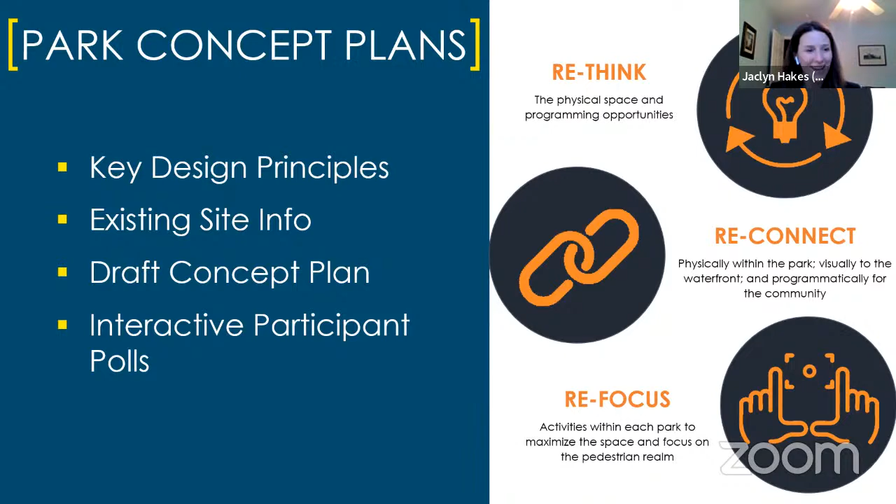And I do see some faces that I'm sure were part of the second public meeting where we introduced this, so this might look a little repetitive to you. For that, I ask for your patience. But let's start with the ball field.

Let me get my cursor here. So the key design principles for the ball fields are really to look at the parking, identify ways to improve or expand the parking, and look at the pedestrian circulation within the park, and potential connections - not only to the activity centers within the park, but outside of the park to key destinations.

When we asked the public what they thought of this - I'm not going to have you do the poll. Oh goodness, it stopped. I wanted just to see the reaction, so this is not working because I'm live. So that did not work out so well.

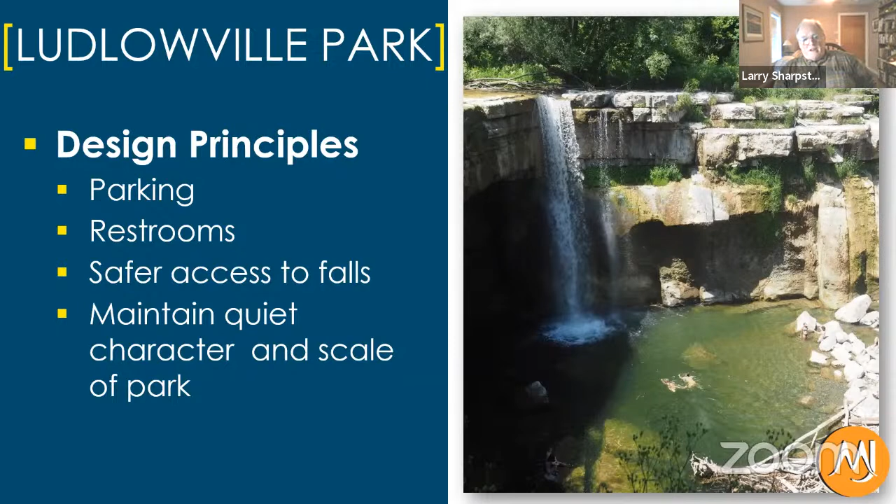So I am concerned—I agree with Dean about getting lighting in there. And I'm also concerned about having the place patrolled regularly, to make sure things are done so that the town has at least done its due diligence with regard to life safety for the residents and the users.

Okay, Jackie, one other thing I noticed—at the northeast corner there's currently a crosswalk, and it doesn't look like that crosswalk is incorporated into the trail system, for coming across the street from the north. Sure, sure.

Okay, you develop a lot of parks—is this adequate parking considering grandparents come and watch their kids?

And to your point, one of the key things we had in mind with all of the park improvements was trying to make these accessible, for folks whether they're pushing a stroller or have other mobility issues—making sure, by having some of these more formalized pedestrian paths, that these places are as accessible as possible.

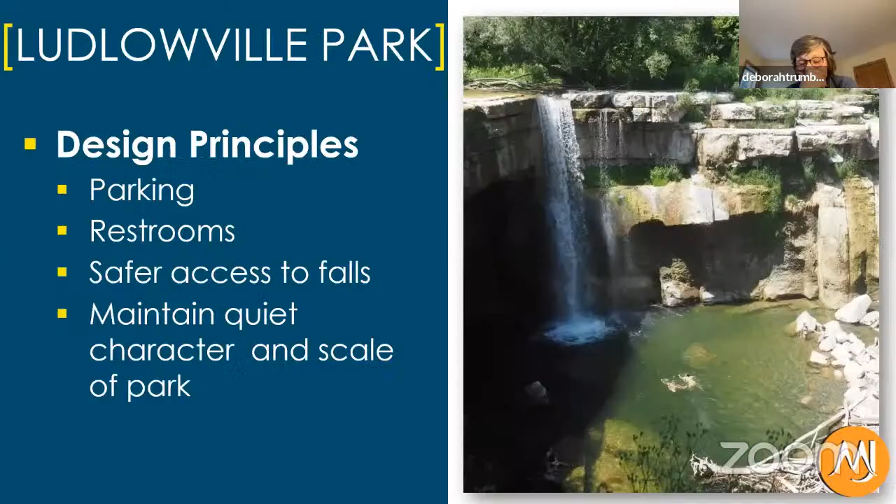Here's Ludlowville Park. The key design principles here were to add parking, add restrooms, create safer access to the falls, including an overlook. Here's some of the expanded parking, the restroom, also a perimeter path, access to the falls, and ultimately maintaining that quiet character, because this does truly serve as a neighborhood park. So that's what's identified here.

Myers Park, obviously your flagship. This had the most significant amount of proposed improvements, focused on design principles related to parking, pulling that parking away from the lake, because it really was blocking access, not only visual but physical access to the lake, which is such an amazing resource. Enhanced pedestrian circulation, restrooms, and creating more defined spaces.

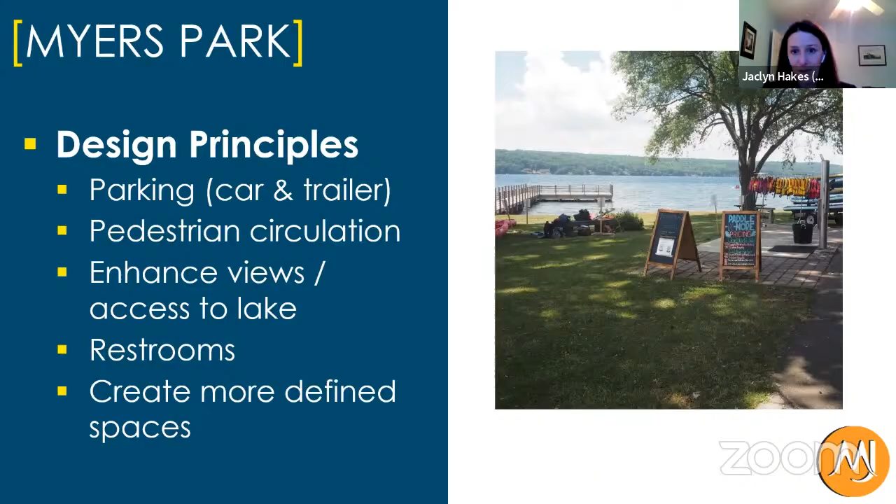You'll see the parking got shifted over here. There's 193 parking stalls in this concept, with 75 boat trailer stalls. The RV campsites remain here. There's the addition of 5 additional tent campsites. Turning what was the roadway into more of a pedestrian access, improvements to some of the facilities including the bathrooms, creating kind of a nice little promenade along the waterfront here. So those are some of the key elements here.

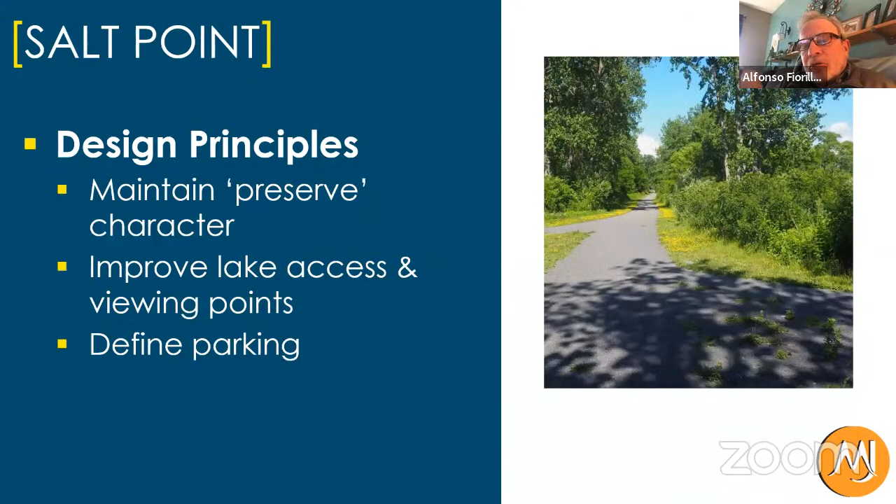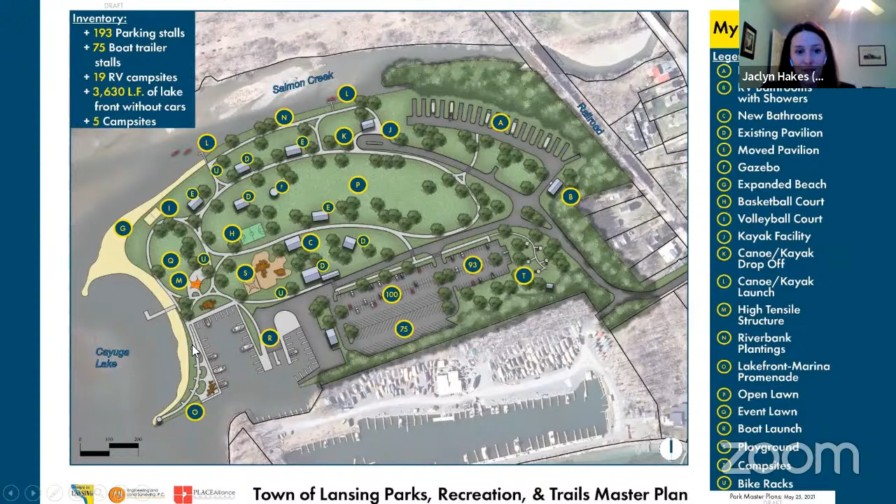These two brown structures by the boat slips, what are those? I didn't pick that up. The boat slips here, the down marina here. Yeah, there's a brown structure in the corner. And the other brown structure, what are those? Those are part of the promenade, so artwork or some creative visual aspect of this promenade to really turn this into an area.

Here are some of the conceptual elements along the promenade, like trellis swings or creative seating. Thanks for showing that pavilion. I think that's important as parking is moved away from the pavilion, that's a great part of the concept. The whole idea is wanting to keep it convenient for people, but still not giving up some of the most valuable space in your park to parking vehicles.

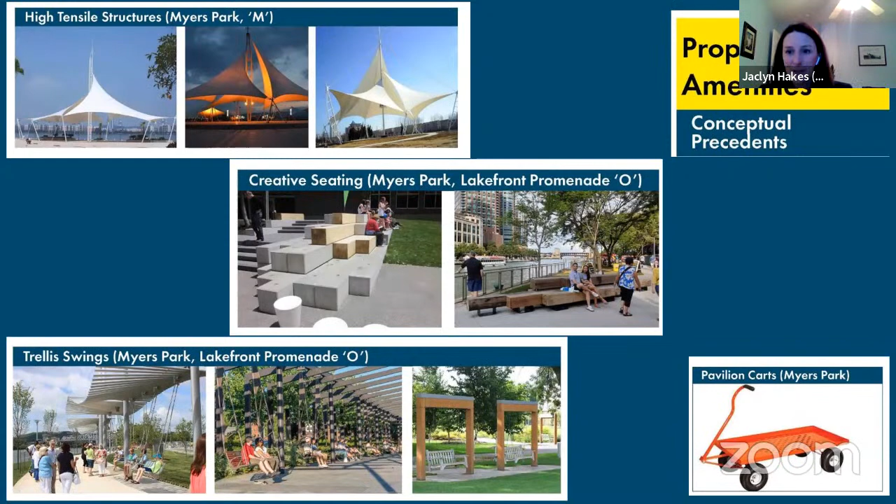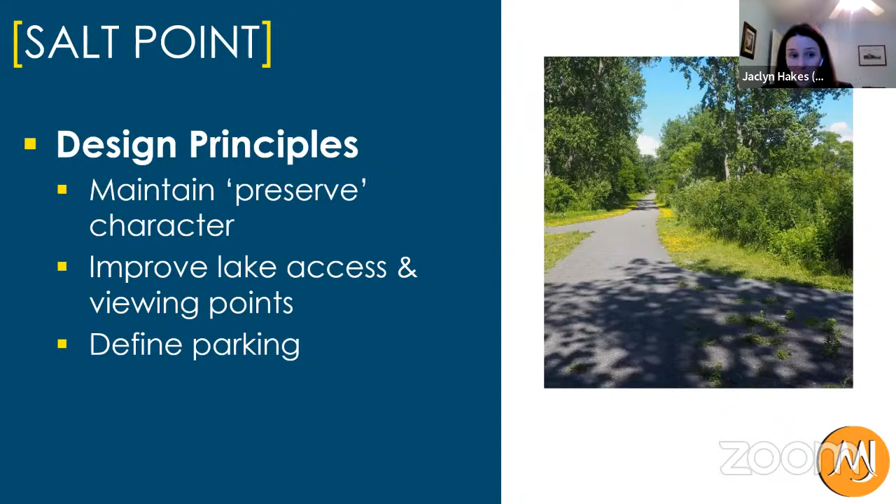All right, so here we have Salt Point. The idea here, and I use the term preserve lightly, is to maintain that character that exists within Salt Point, but also try to improve lake access and viewing points, and define the parking a little more clearly. The existing parking stays, but we create a more formalized path for the fishing area. Then adding additional parking, allowing for folks to offload, whether kayak or other type of boat, and connecting with the existing pathway. These D's identify maybe some additional access points along the waterfront area.

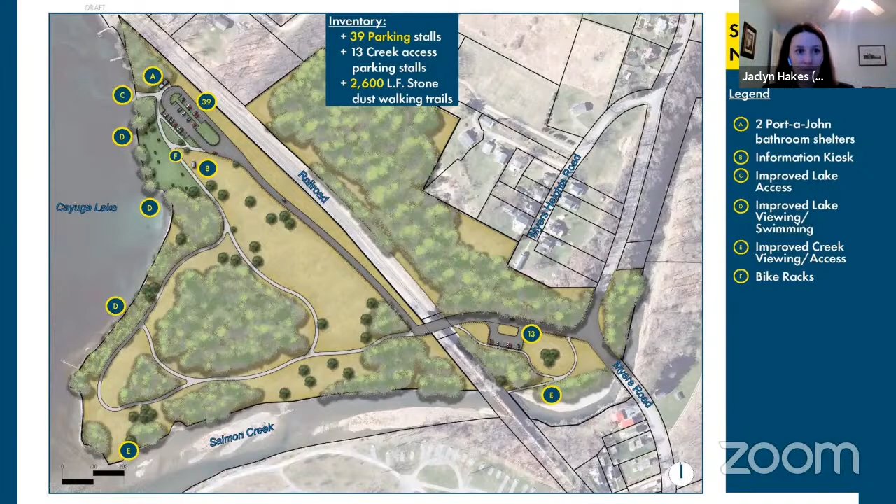The barn field, some of the design principles here are really focused on parking, restrooms, pedestrian safety. There's really no formal space for pedestrians other than on the road right now. Opportunities to use this as more flex space as an open field. Adding some protective fencing and additional recreational amenities.

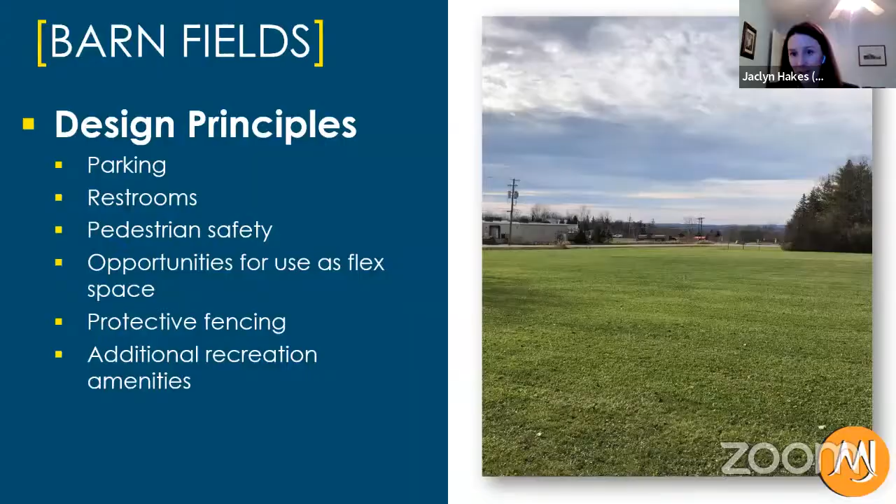What we're proposing here is utilizing the shared parking area, defining it a little more, having a crosswalk, creating a pedestrian pathway along the edge, adding some trees for shade for those watching the kids on the field, creating a playground area, pavilion, and some picnic table areas. So it can be more than just a space for active recreation, really enhancing that area. Also identified here are some drainage improvements that we understand are necessary as part of the field improvements.

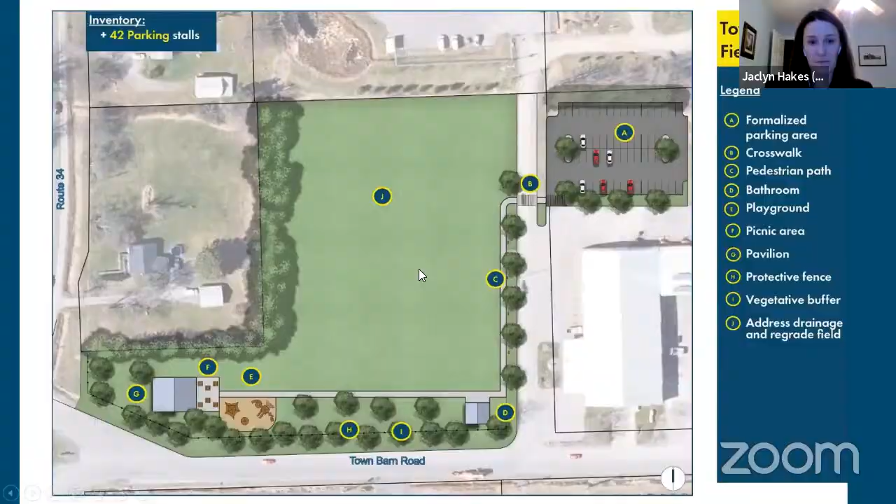Okay, so those are the concept plans. I can share this with you, and also share the link to where they can be found on the website.

Just very quickly in terms of the draft master plan, the committee is currently reviewing the draft master plan document itself. We were hoping to have that finalized very soon, but I'll need to coordinate with Pat and CJ about the timing, given that the planning board is looking to provide some additional comments on the concept plans. Ultimately, this is the roadmap for what future improvements and investments should be made within your Parks, Recreation, and Trails system.

There are 6 sections within the master plan itself. If you see my cursor here: there's an executive summary, an introduction, a section on the benefits and need for recreation and parks planning, a discussion about the regional context, recognizing that while the town has its own park system, there are recreational opportunities more focused on regional connections. Then we focus on existing conditions, the Lansing Park System Today section. And then the concept plans, with cost estimates for improvements and the implementation piece, which we're calling the Lansing Park System Tomorrow. So those are the sections.

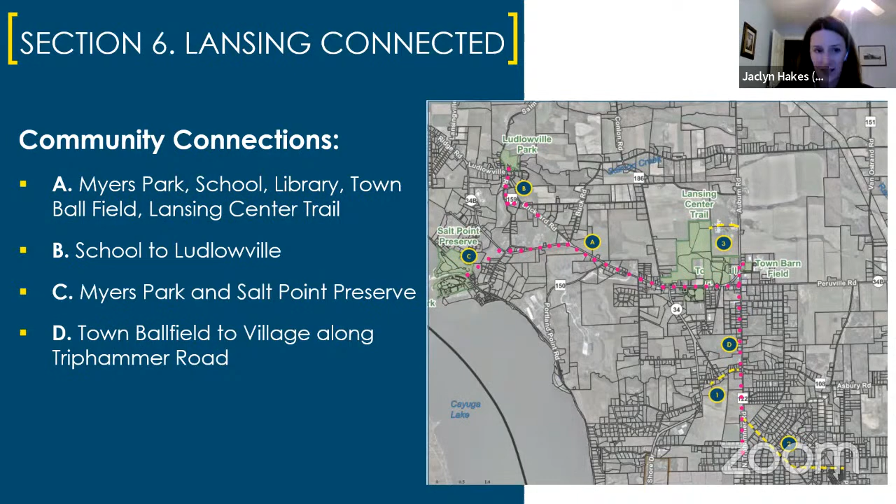One other thing I want to point out is that there's a Lansing Connected portion within section 6 that looks at trail connections. We're working with the committee to finalize this, but there are broader community connections—key destinations and connecting those destinations, whether it's Myers Park to the school to town hall. Then we have smaller neighborhood connections, some closer to the village. We're working with the committee now to identify key nodes to be connecting through this connections concept plan. So that's what I have.

I know that was really short and we kind of got off track a little, focused just on the ball fields, but we do appreciate those comments. CJ, if the planning board does want to provide additional comment, we can send them the links to the concept plans. If there's a time frame within which we could expect those comments back from the planning board, we can regroup in terms of how those get integrated into where we are in the process right now.

So Jackie, a quick question: the last document you just showed, with the 6 different points, where is that on the Parks, Recreation and Trails Master Plan website? It doesn't exist on the website yet because it's still going through review by the committee and the town.

Yep, I think that's important to bring out. As an example, after this presentation we're going to be meeting with the convenience store, and sidewalks along the road that would connect Town Hall with Myers Park—you've got to start somewhere. That Dandy Mart and the sidewalks in your concept plan connecting the ball fields with Myers Park, with Ludlowville Park, all should be integrated. That's got to come out or be approved by the town board, I think, so the planning board can keep that in the back of their mind as we work with different projects.

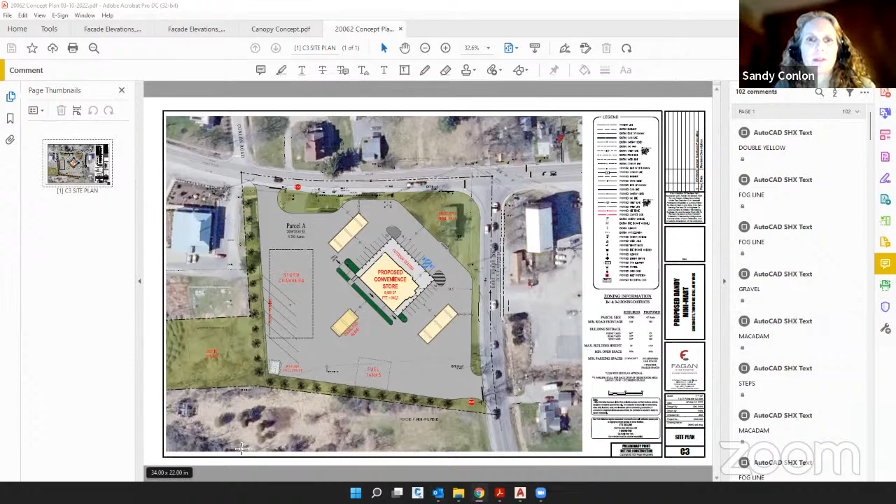Yes, cool. Okay, so what you got in front of you is our latest rendition. Let me just close that, make sure I get rid of this YouTube channel. Sorry, can you zoom it in a little bit? Yeah, definitely.

So we did get commentary from DOT in the meantime as well. They've stated that the two preferred locations... obviously we're not going to get a third driveway, so we took that out. We went by where they said to place the driveways, which is exactly where we had them before, the two most distant from the intersection. So that kind of informed us on how to proceed on the rest.

To also maintain the front visual of the intersection being our front door—this is a corner lot, so it gets a little more complicated. We broke the canopy up into two and relocated them on the sides. The diesel island is in the same place it's always been, the drive-through is still working on the back side, and we expanded the outdoor seating area out to the front, or we'll call it the front, but it's towards the northeast corner of the site.

We also expanded the landscape area to the corner, roughly 2/10 of an acre out of the site, around 8,000 square feet in this area. As you guys were mentioning before, the big thing is to get the orientation down for the building, get the layout for the building, but then we'll come back and populate a landscaping plan and screening plan.

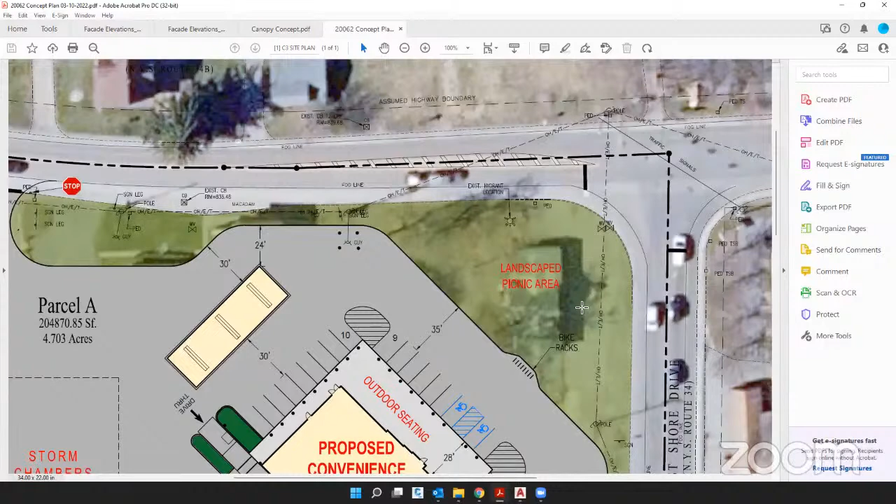One of the things I did want them to look at is the potential of restriping this area so we can work with what's out there, potentially reducing the shoulder and creating a turn lane there. The one thing they worry about is the left turn motion creating some conflict. So we brought it up to them. We'll continue talking to them, but if you've ever worked with DOT on stuff like that, it takes a while. I wouldn't be surprised if it takes longer than what we need from an approval point of view. But we will continue to discuss it, Jamie.

When you were saying you needed extra acreage or depth or footage there, are you talking like 2 or 3 feet, or are you talking 6 feet or 8 feet? What do you think on that?

It depends what they would require, but if you're trying to mimic the existing shoulder width, you're pretty much talking about another 8 feet interior into the site. But with a turning lane, you don't need that existing shoulder width, do you? That wide width that's there now? That would be my argument, yeah. But DOT has their own determinations there.

Okay, but if you notice the width of the shoulder here versus the width of the shoulder here, it's about the same. But like you said, over here, people... well, that's shoulder. I guess I've always treated that as a right turn lane.

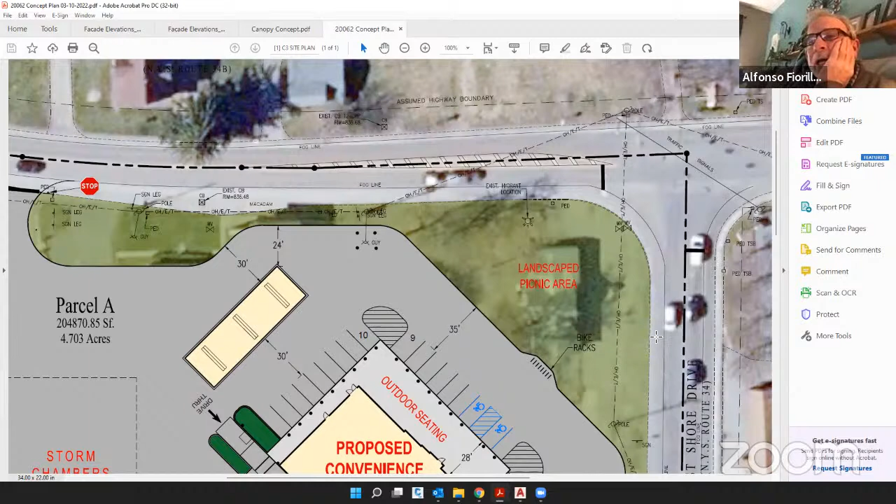Maybe I'm wrong, but no, yeah, it's illegal, it's a solid white line. I shouldn't have said that, huh? But there's a sign there now that says don't do this. Oh really, there is? I didn't even pick up on that. Yeah, wow.

And given the curb, normal condition in a municipal area, in a built-up municipal area, if there were a granite or concrete curb in place, I don't see a need for a shoulder on the turn lane approaching from the west.

Was a proposal made to them of providing a curb? We haven't made any proposals to them. We don't have any indication the project's moving forward yet. So we've just done the initial application to say, okay, this is the scale of the project, this is our proximity of the driveways now. And then they've actually looked at the scale of the project and said, okay, that's great. This is where you're going to be looking at the driveway locations. Here are the dimensions that are given to us. And then we go from there.

The actual intersection, work within the intersection, we cannot do that. They would actually have to incorporate that, because there's no requirement from this size of a project to do any improvements to the intersection. The intersection is a signalized intersection that operates efficiently in their mind. Might not be in your mind, but in their mind, it's got an acceptable level of service.

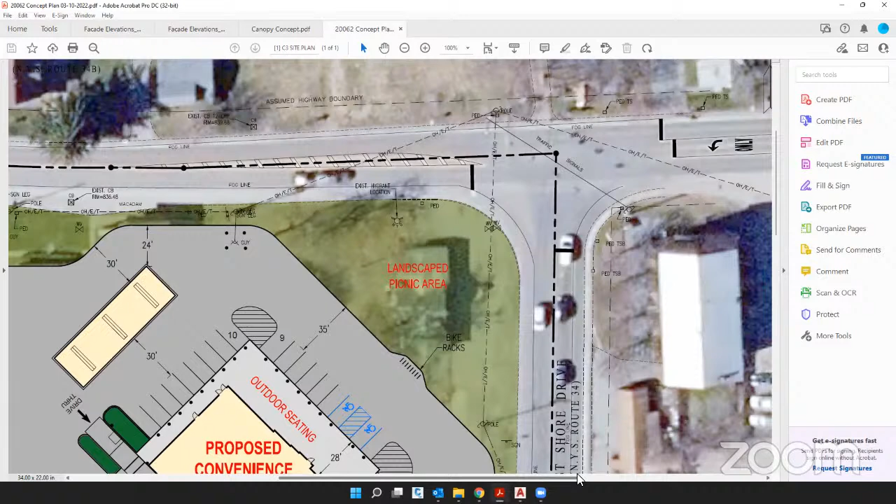So to request additional improvements to that intersection takes a lot more. We'd have to go in as a combined applicant, the town and Dandy, to actually approach them on that. Okay, so I think that's a separate conversation to be had. Let's put it that way.

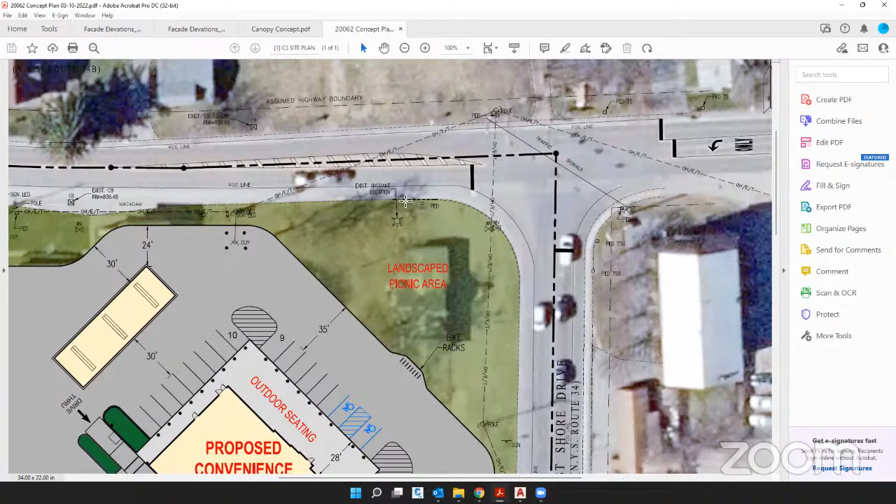So Jamie, there's concrete curbing the state put in maybe a year ago or so on that corner. Yeah, just right there. Is that what you're looking at as being the existing line that you would use that's there now?

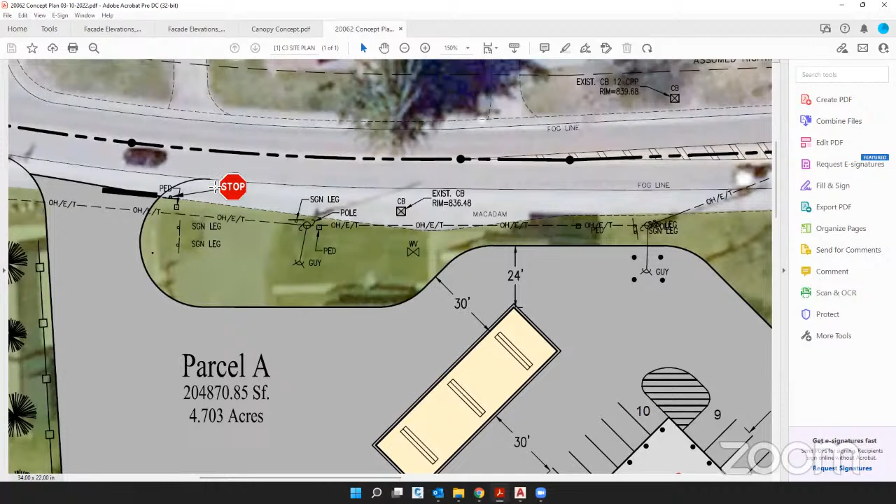Correct. We would not, under this approach with DOT — they're only having us look at within the radii of each of the driveways. I apologize, this is going a little slow. So you've got here to here, which is a 36-foot drive, as well as on East Shore Drive.

So would you be extending that curbing in each direction, south and west, as part of this plan? Or would the DOT do that? I don't think... or would there be any? They haven't stated that would be required. I guess we'd have to look into why they required it for the intersection, other than they probably just put it there to make sure people didn't cut the corner.

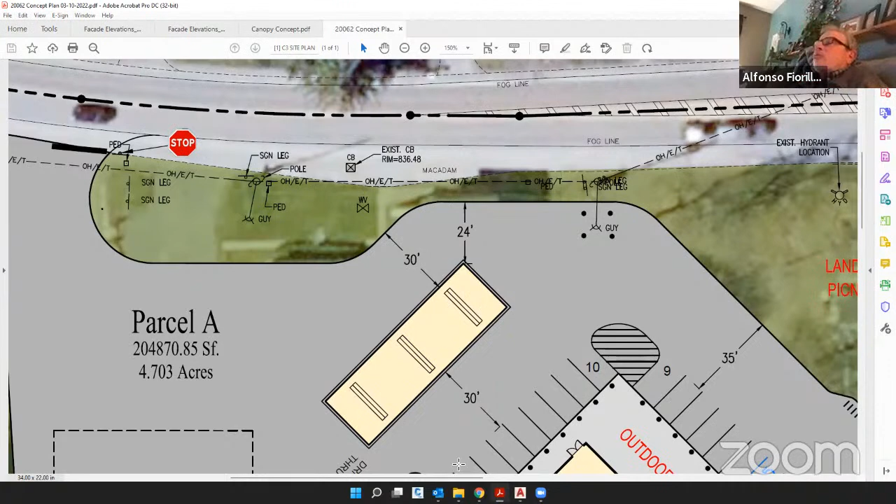Yeah, I think you're right, I'm guessing you're right in that situation, because with this type of road, you typically do not put curbing on. It's actually a danger to the public, the traveling public, in their mind. They would rather have the wide shoulder. Okay.

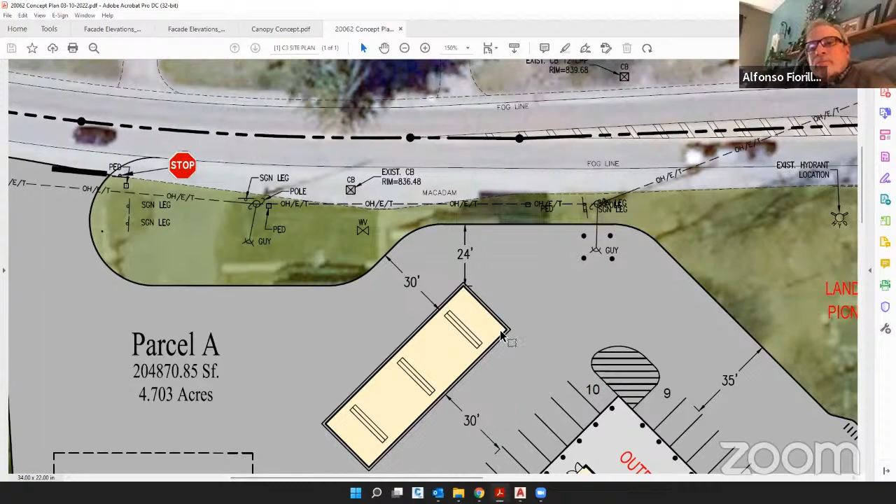Your exit off of East Shore Drive, there's a house right across the street from there. How are you going to mitigate the impact of having an exit right across from somebody's house, in terms of headlights shining in their house every time somebody turns? I don't know what you would actually do for that, other than the position of the drive is being dictated by what DOT wants.

Now, if we need to move it—actually, I'm just kind of looking. Joe mentioned that there's a culvert or a creek there at that drive existing. There is a creek there of sorts. Yeah, we would be able to handle that from the drainage point of view.

But we haven't gotten into that yet. We kind of went back to scratch to make sure we got the layout right. Once we get the layout right, then we'll go into that exercise of grading. Grading design takes longer for us to actually do than the pretty picture you see in front of you. But we would need to go through and make sure that we're not impacting our neighbors, obviously.

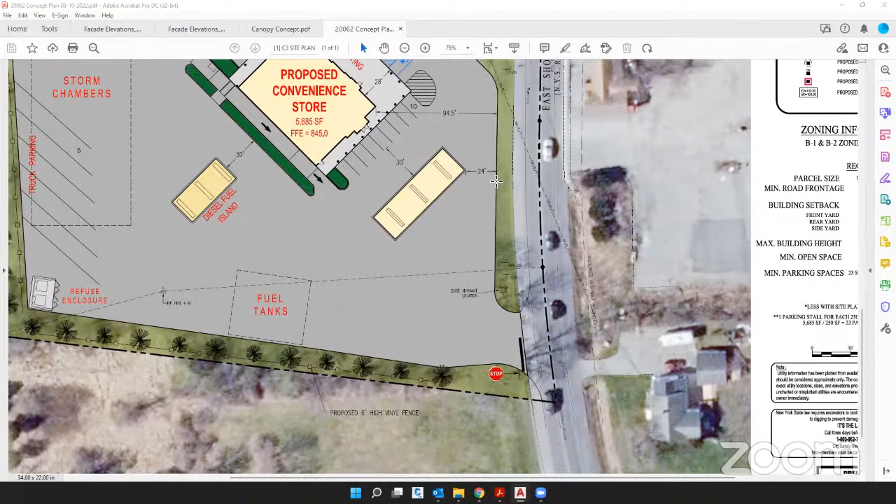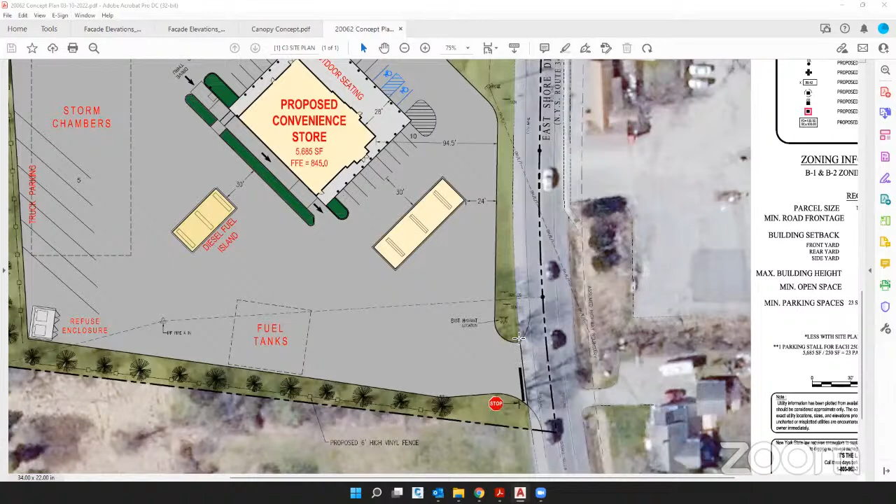More than likely, the way we would design this is that any stormwater captured in this green area between our two drives would be captured into our stormwater plan. So we would take on more, even though it's not required, the stormwater from the road, because no matter what you say to someone, if you put a culvert pipe through here and there's water flowing through it, it's all of a sudden our problem. Even though it's probably there already because of the road, we would take care of that and use our storm system—our storm system's oversized.

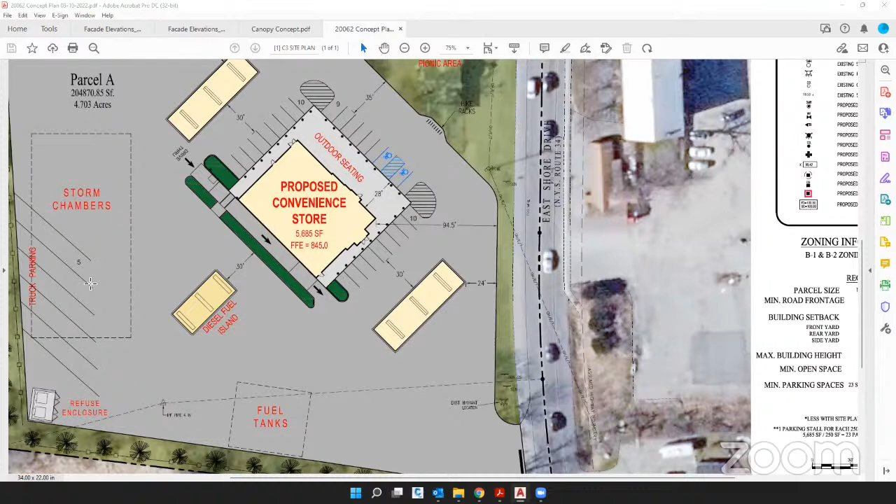Initially, we've actually kept the original design on the books right now. Our lot coverage rate is actually reduced based on this layout, so we've reduced the amount of square footage of impervious surface going into the system.

On this layout, Jamie, where are the electric charging stations? I was thinking they would be in this area here, but I'd better double check with Dwayne. Dwayne, are you still there? Honestly, I haven't thought through on this one where we would relocate them—whether they'd stay in the area of the building where we had shown them before, which would be right where Jeremy is now, or if we may relocate them off into more of a standalone area. Okay, they will be on there though.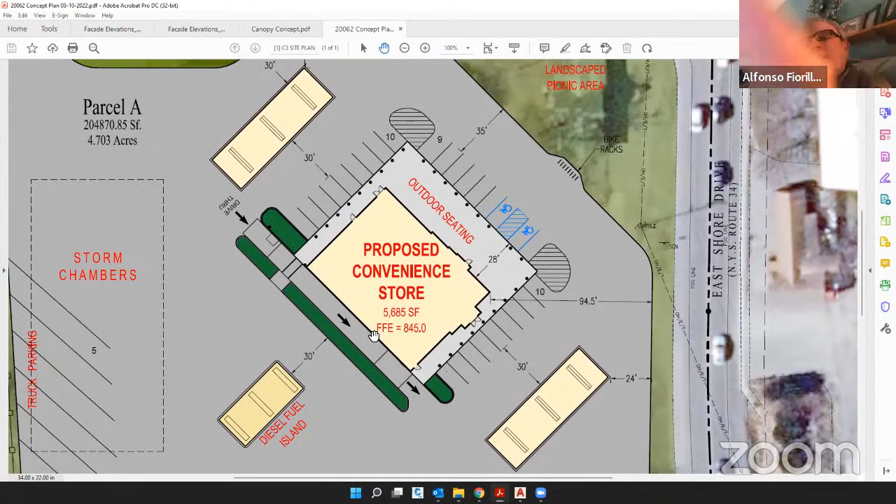So while we've got this layout, let's say we're okay with this. You've got the gas island to the northwest. There would be an entrance door, those double doors—is that what they would use to come into the store? No, what we're proposing with the layout we're working on actually has three entrances. The building we're working on, we're going to try to make it look as though it has three front entrances. So the single door towards the fuel islands on the northwest side would be the entrance. There's also a door, which in our latest rendition is actually a double door facing the intersection, and then double doors facing East Shore Drive.

So the gas islands—the flow of pedestrian traffic from the islands to the store, if they left their cars at the island, would use those side doors, and then the seating area would use the door to the northeast, so to speak. Is that the correct idea?

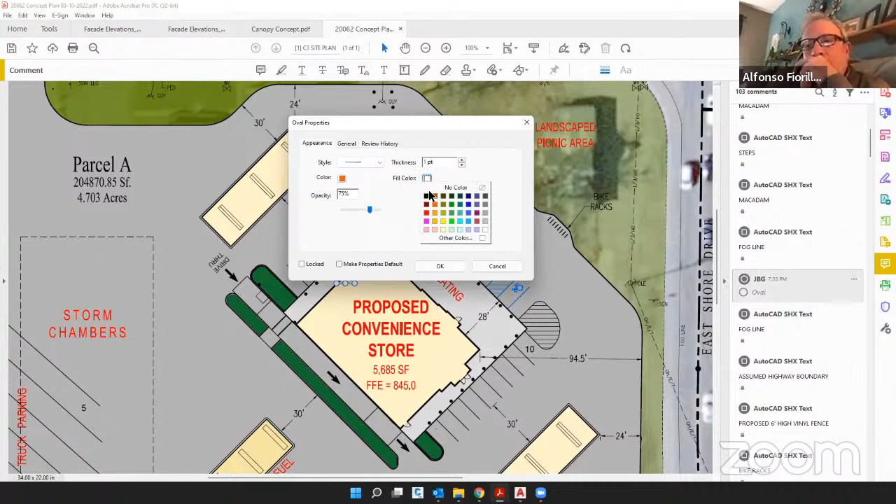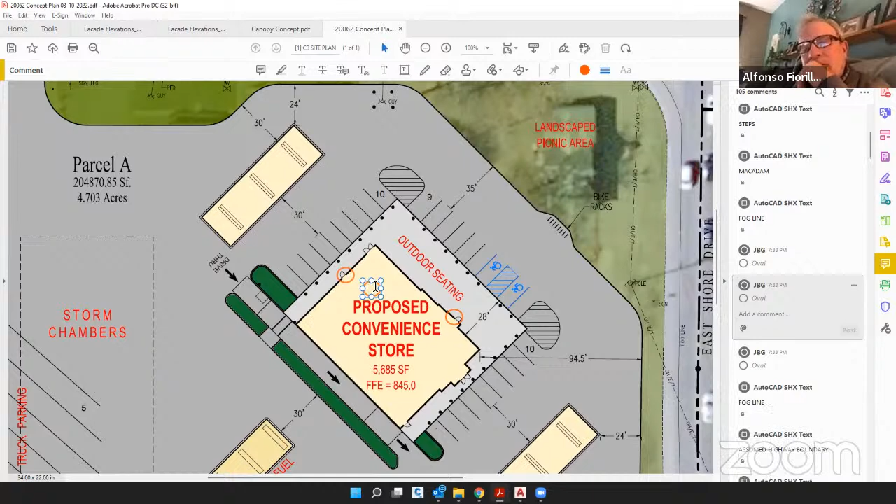Yeah, we're trying to create a store that—again, we're in the convenience business—we're trying to create a model where the person, if they're looking for fuel, it's easy to get into. But whichever fueling location you're at, you also have easy access to either pull ahead and park or just come inside the store through an entrance. From your seat, I hope you can appreciate the fact that we're trying to create the look of three entrances, because a lot of traditional buildings have one entrance, so you have one side of four that looks great, and then three other sides that are quite plain typically. We're trying to create something that has curb appeal on all four sides.

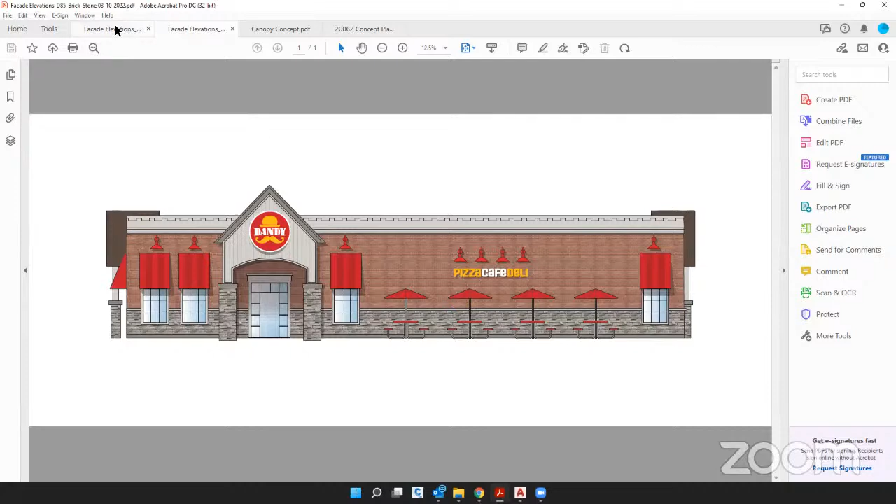So this was the initial layout, or elevation - just the front elevation towards the intersection. The architect further refined the entrance, so you see it faces northeast towards the intersection, with similar features on either side. We don't have the full renderings yet, but we wanted to get what we could in front of you.

Could you talk about the materials, the finish, the colors on that? Yeah, so this would be a stone - I wouldn't call it a knee wall, but about 3 to 4 foot tall cultured stone all the way around. Then brick - that would just be a red brick, and the tones we can still look at.

This is your initial rendering - we need to see what the materials are, how it would play off the Rogues Harbor brick. If you look at... well, I guess I lost that. Where'd it go?

If you bring up - can you guys see that? That's the brick that Rogues Harbor has. Yeah, it'd be in that somewhere.

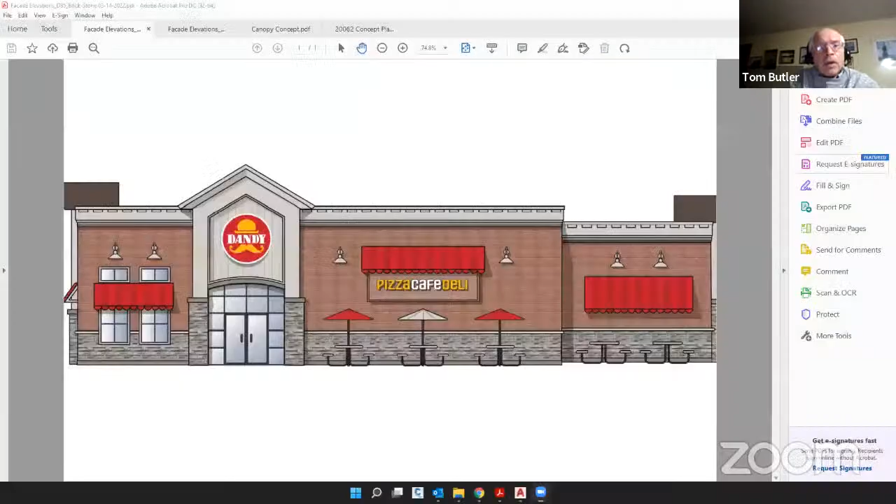So let's start with the exterior that's been proposed today with the stone wainscoting and the brick that matches the Rogues Harbor. As far as that exterior finish, whether it's red or another color, or it's metal, the awnings, that can be decided down the road. But the gist of it is the stone and the red brick, most board members find that acceptable. Is that true? Yes. Yeah, that's pretty appropriate. Yes. Okay, so I think we've got that more or less. That's a positive.

So then the next step is, there's some discussion whether that peak should stay the same, should come down, or the whole building should be peaked with a shed type roof. So that's where we're at right now with that concept. Dwayne or Jamie, is that a possibility to take a second look at the stores that Larry mentioned, to see if it's feasible or not?

It's feasible. You can build anything, whether or not it's practical. My preference is to stay with the concept that we're showing and not go back to a full gabled building. We've gone to this for many reasons. A lot of them are operational, they reduce operating costs, and it's safer for our people to work on equipment because it's on the top.

You know, there's a lot of reasons that we haven't built a gabled building since probably 2011 was the last one.

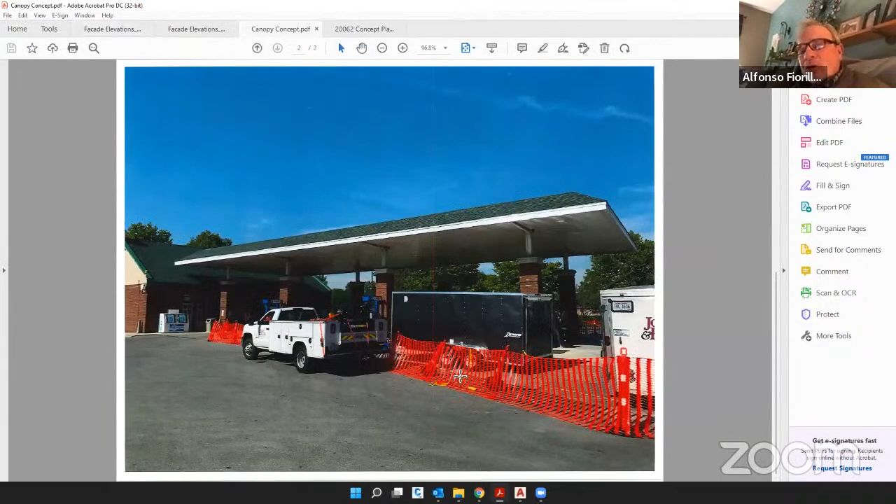Yeah, this is a canopy that I found. I haven't got all the specs on it yet. But it's a shingled canopy and the shingles, whatever we pick, would be in a color to match the gables over the entrances.

And the columns would be laid up probably with a stone that also tied back to the entrance on the building. If Jamie goes back to the building, you'll see the elevations show the stone laid up, so those canopy columns would mimic that.

And we would then, obviously, try to tie the two together. They did that at the bank, the recent bank construction on Triphammer Road. They put stone on their columns to match the bank, and it looks pretty attractive.

So you wouldn't need any striping on that canopy or any signage on the canopy, correct? Yeah, I don't believe so. I don't know what the specs are. I'm not even sure you could put signage on this canopy.

Well, I just think the community would appreciate a canopy such as the one that's in the picture right there, as opposed to something with striping or neon or red. This canopy doesn't lend itself to that for sure.

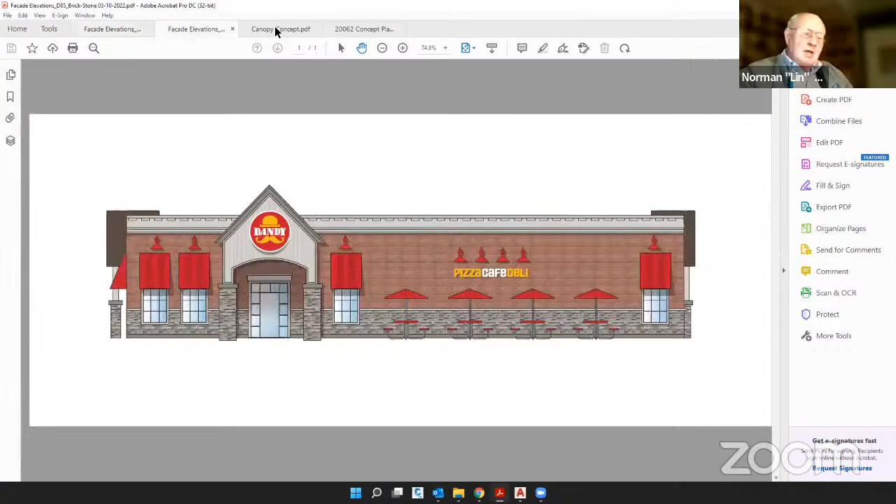One thing I would like to point out is the outdoor seating. It's a little exposed. I realize there's parking there, but any idea of a little parapet or wall to keep the napkins from flying off the table? Certainly, good one, something we can look at.

So those dots, what do you call them, bollards? Yeah, bollards. The whole intent is to have this all at grade so there's no trip hazard all the way around, but if you do that, you need something to keep the cars from continuing on. It's either that or wheel stops, and the bollards are the preferred treatment. Okay, bollards are a great idea, they work a lot better.

Yeah, the Shortstop had a few cars parked in front of their store over the years. I've seen it.

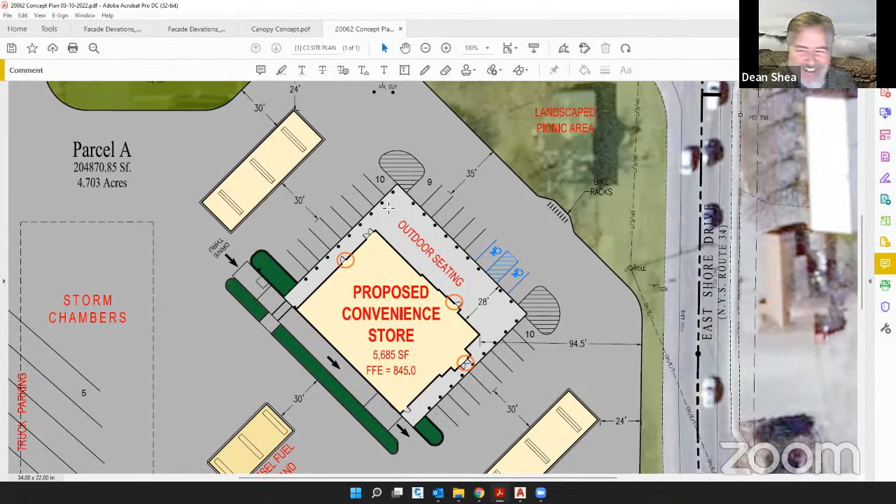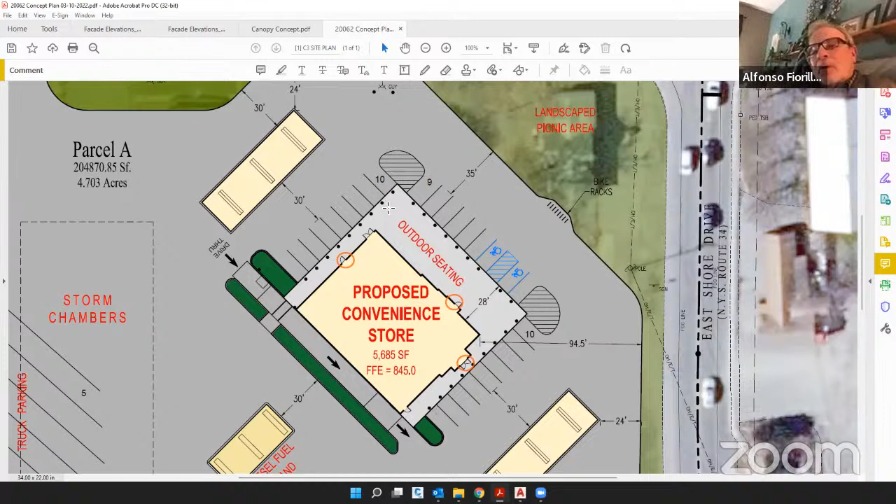What color will the bollards be? I don't know, they'll be gray. I would think a gray or neutral color would be good. And the canopy for the diesel fuel would mimic the gasoline canopies? Yes. That would be very nice.

And you're going to refrain from outdoor ATMs or ice machines, is that correct? That's correct. The only thing typically we have outside are propane cylinders. Would those be next to the store, or are you thinking about putting those out towards the back? They would be next to the store because our employees have to access that for the customer. They're typically protected by several larger concrete bollards, about where Jamie's mouse is.

And somewhere in that area is probably where they would sit. That's perfectly logical, and that's about as hidden as you could be there. Yeah, it's on the side away from the main exposures, hidden from 34B by the pumps and whatever plantings are on that berm there.

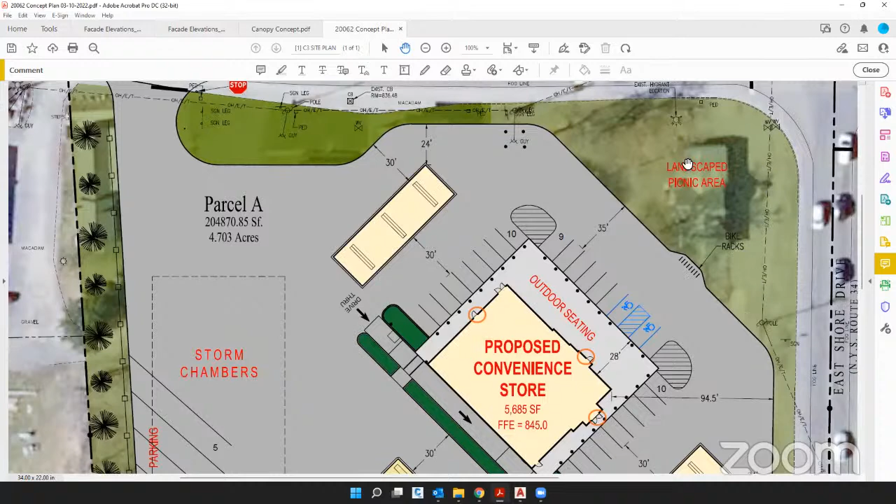Did we talk about what we want to see in this landscape area? No. So we're looking at landscaping. We talked about a table, but that wouldn't make sense just from a safety standpoint. So maybe a bench or two in this area. There's going to be some bike racks here, we think that's probably the logical place for that. But this will pretty much be landscaping.

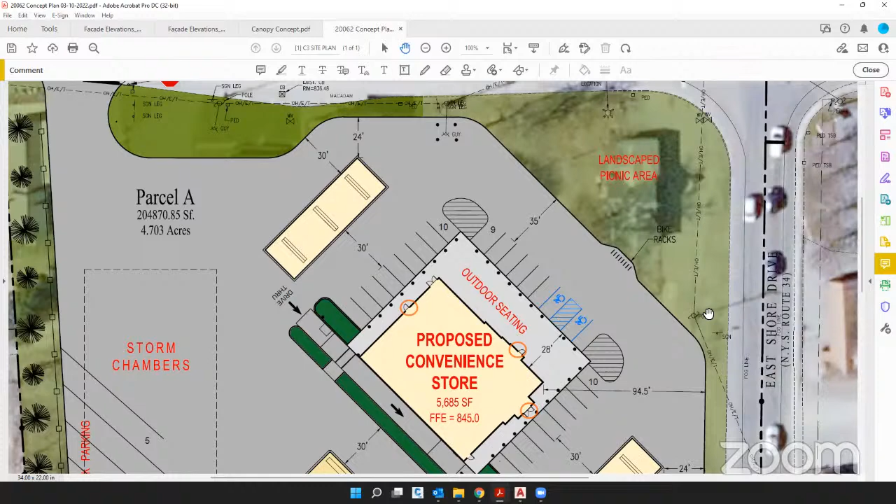Dwayne, from a signage point of view, we wouldn't put any signage in that area, correct? No, the signage would be out towards the entrances and the drives, so that would keep this pretty clear. Now keep in mind, there are some poles out in this area, that's why I wanted to add that onto this drawing so you can see it. The fire hydrant's there as well.

Al, can I jump in here for a second? Sure. So the landscape picnic area here, would you consider something like a monument sign that could act as a little bit of mass and buffer, and also allow for use of this space? I'm concerned this has kind of become a dead garbage corner unless we incentivize some way to enjoy it. I'm assuming that 35 foot there is a fire lane, or for fire code. Yep. Okay, and you said all the entries are functional, right? Yep, to the building.

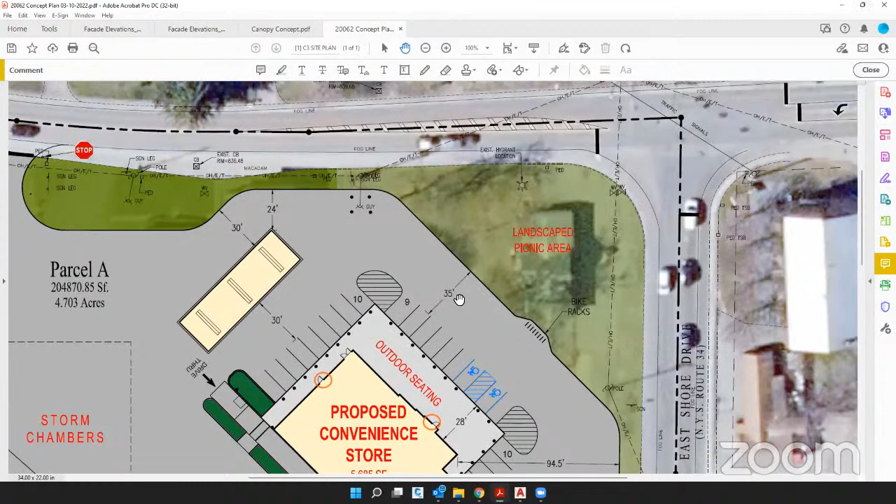I'm wondering if we can consider something to connect from a pedestrian perspective that outdoor seating with the landscape picnic area as well. We're thinking maybe some kind of textured sidewalk to really connect that outdoor seating with the landscape picnic area, and then maybe consider some monument signage. I think John circulated something like a Wawa that had monument signs with a bit of that massing there.

I was thinking that could be a really cool way to help people who did want to sit and enjoy that area to kind of feel safe, because one thing I hear as feedback is that this corner, when you're sitting in this corner dining, can be really loud. So it could serve a double purpose. At least that's kind of an idea conceptually.

May I add that the folks are talking about putting signage down at the two entrances, which I like. I prefer not to have a sign in the corner, as originally planned. But the same effect could be done by putting some hardscape in there - say 2 or 3 boulders, or a low wall, something with some mass. Boulders would require less maintenance. Low walls, if built out of brick, will have problems with efflorescence and look streaky when the calcium starts to build up. But you're right on the boulders, those won't require any maintenance.

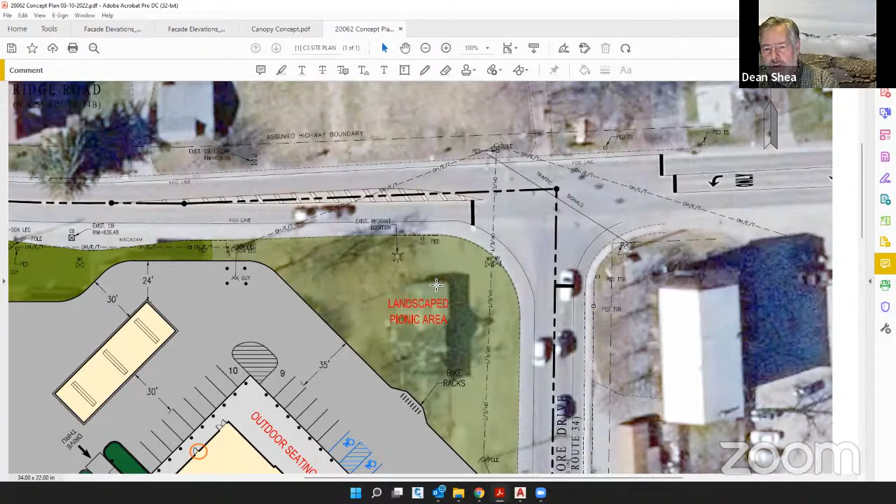How about off of the corner, for your traffic? If you look at that north corner, where there's a little loop with some stripes off the corner of the outdoor seating area, just to the north corner - from there, foot traffic could go across to the northeast to the picnic area. Typically what I like to do is build off of the ADA aisle. Well, I saw that too, but you've got a bike rack right there. I can move that pretty easily - slide it this way.

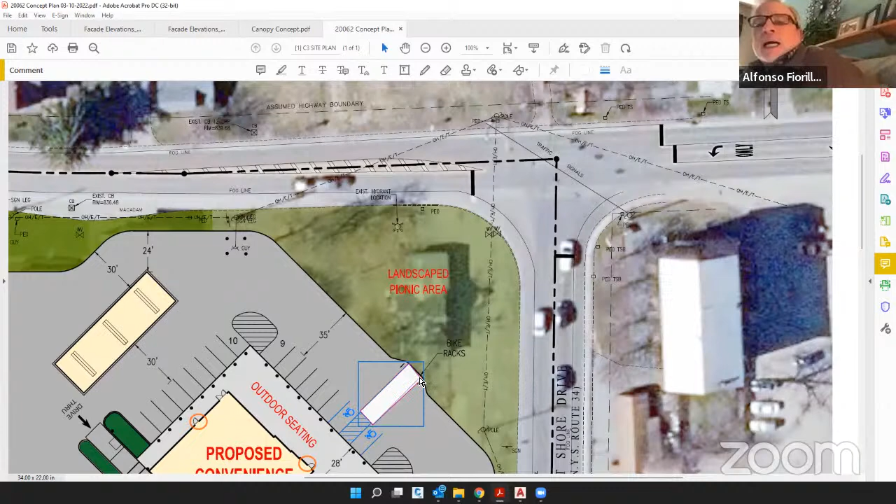There were comments about sidewalks between the road and the landscaping on the north and on the east. Is that something the community or the planning board would like to see? Well, I think the community would probably like to see it. Personally, my feeling is about things that require additional maintenance.

I would think one of the goals would be that any walking traffic from the ball fields or the neighborhood would be able to cross at the intersection and walk through the area being shown to get to the store. I could see the B&B tenants or occupants wanting to walk across the street to the convenience store. So there should be some type of sidewalk connecting the store with the corner, either at that intersection or something.

There is a logical need for sidewalks, both along the street and from the street to the front of the store.

Larry, I've almost hit - I can't tell you how many - people walking on the side of the road wearing all black at night with no reflectors, and you're driving in the rain and it's dark, and you come upon a person right on the edge of the road, and you're like, oh my God, you're going to get killed. I'd like to do whatever we can - but that's called Darwinian selection. It'd be okay if they didn't have a Labrador dog.

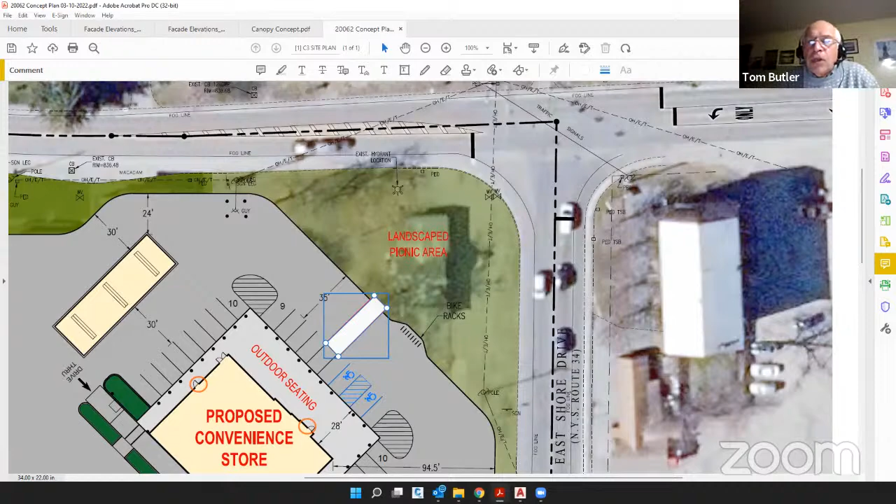The trees across the street at Rogues Harbor Inn have held up really well and look pretty nice. I'm not sure what species they are. I talked to Dan Siegel about it, and he said he thought they held up well, and he could find out what species they are. We do have to keep in mind they're going to be under the power lines on the other side, so we don't want something that will have to be chopped up in the future.

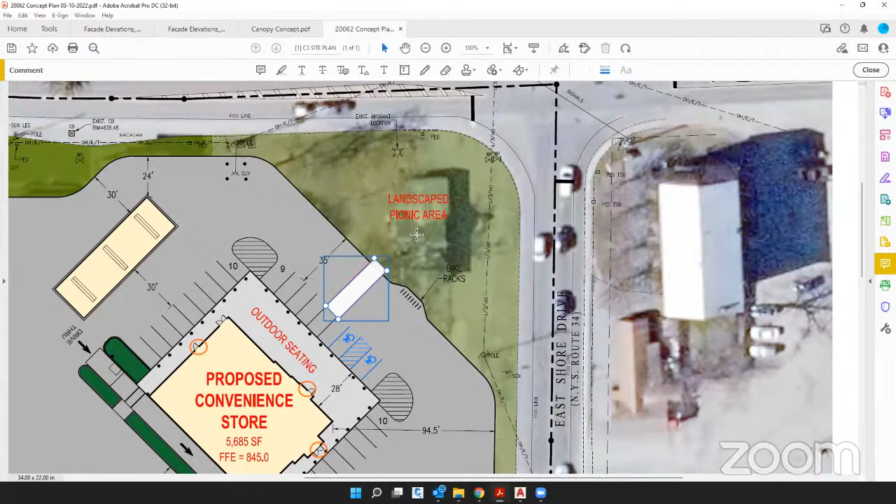Well, keep in mind we do have room in the interior. We won't be able to put trees near the overhead lines, but we could put a couple trees interior of that, away from - the thing I hate most is when NYSEG comes in and chops the tree in half, that makes it worse. So whatever we create, when we create this space, we want to plant species that we'll be able to maintain so we can keep it looking representative of what we and you all want.

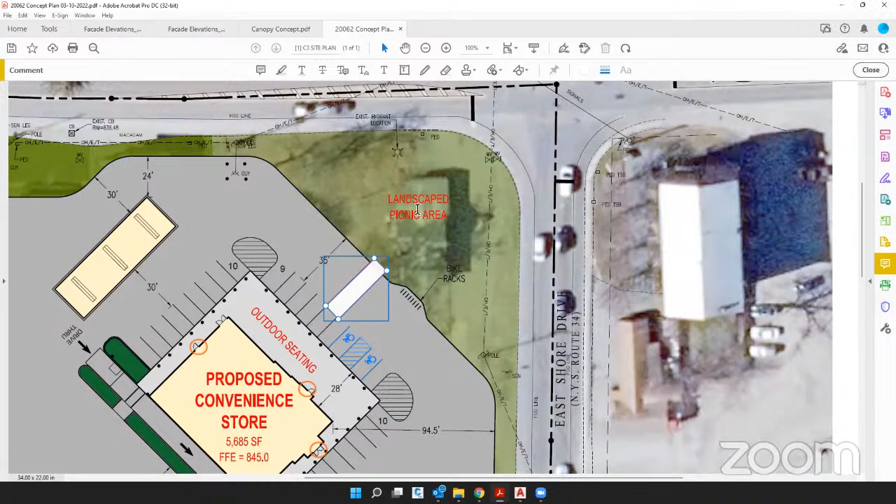It's to have a great looking intersection. NYSEG has varieties that live under power lines. They're using hawthorns downtown - they have nice red berries and winter interest, and there are definitely things that can be done, in areas where there are power lines and areas where there aren't. We're not going to put huge oaks or maples in there, but the thing to remember is to keep your line of sight at the corner free of too many plantings also.

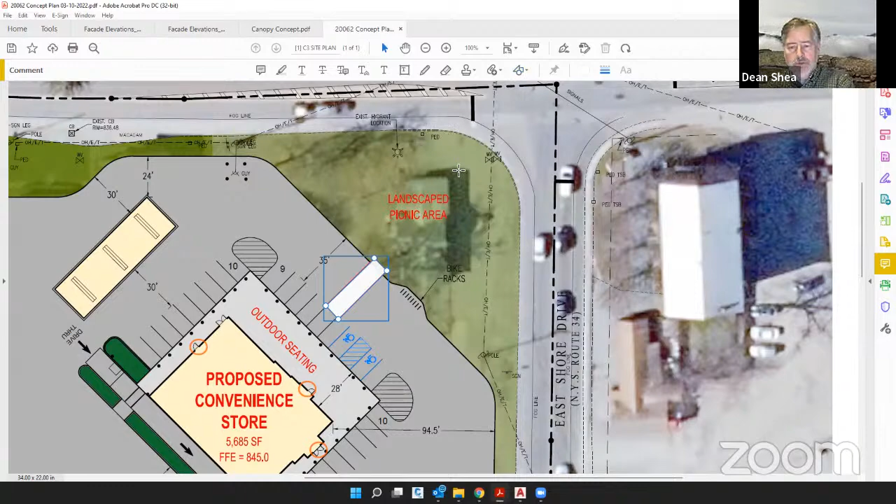CJ mentioned monument signs, and it would be nice to see monument type signs at the entrance down below, because there's no limit to visibility from the road. The place certainly wouldn't be hidden if you put the monument signs by the entrances. They're just classier looking.

Now keep in mind, we do need to have the cost on these somehow. If we're taking the signage off the canopies, we need some sort of way to show it, otherwise people won't pull in if they don't know what the price is, especially these days. We'll try to accommodate that best as we can, but we've taken the pricing off of the canopies. You know how you see those number signs?

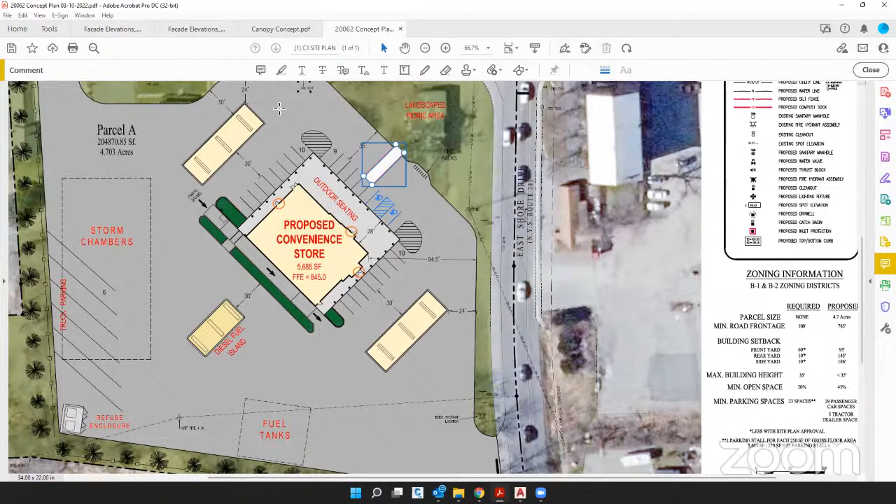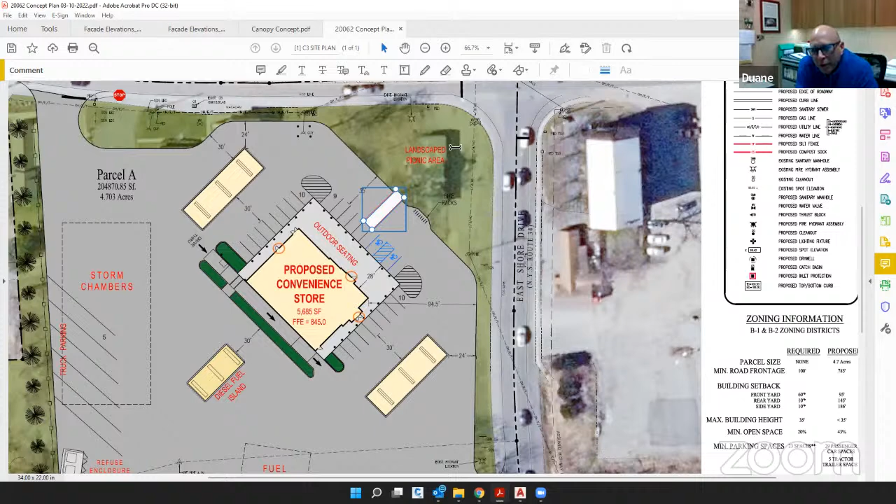But could you surround that with the brick or the stone again to make it compatible if it was detached? Yeah, we've done signs like that. Again, it's just not an area that we've put any thought into yet - the last 10 days we've been working on building and site layout. Now we'll start to go to work on some of those other details so we can present you a more comprehensive plan, and a better rendering of what the site will look like. I would expect whatever we do for signs, we'll probably utilize the same brick and stone so that it all ties together.

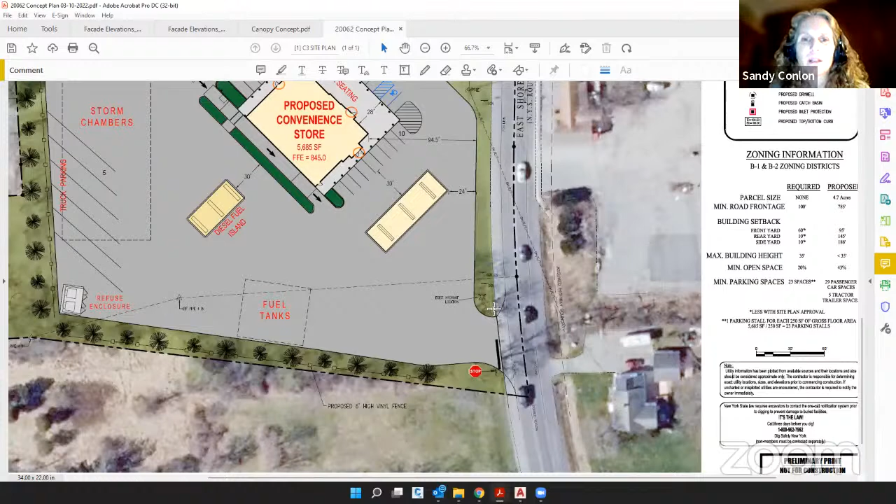Sandy, on the driveway at East Shore Drive, is there a way to shift that driveway over just a little bit so the headlights wouldn't come right into that neighbor's house? Is there anything we can do to mitigate that a little bit for them? We got a little bit of room, but there's that hydrant here too, though. Anybody turning to the south, the headlights are going to wash across the front of her house anyway, no matter where you go.

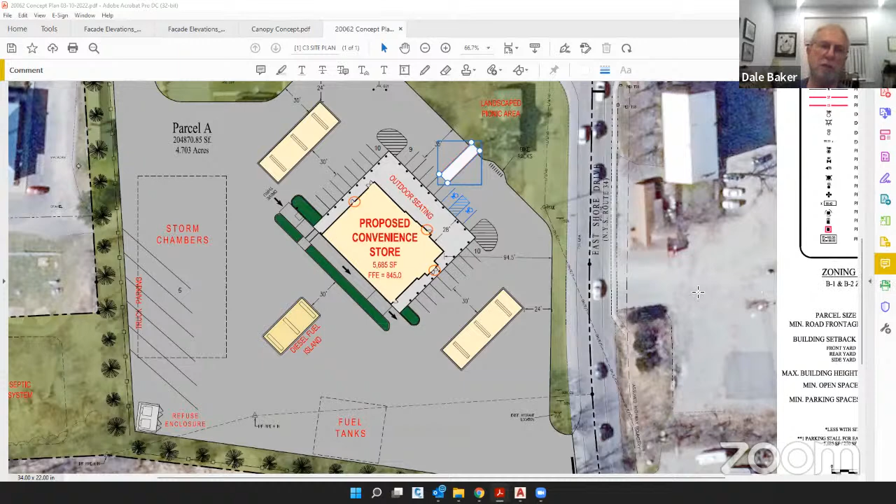Dale, I haven't heard from you much. I just have one question - one of the concerns I hear is increased truck traffic if a Dandy Mart is built. Do we really need the diesel fuel island there, encouraging truckers to come in? We know we've got Rabbit with all the diesel up there. Are you really tied to having more truck traffic here? We're not trying to bring more traffic to the area, we're trying to do business with traffic that's already here. But if you put a diesel fueling station in there, you're certainly encouraging diesel trucks to come in, right? We are, because that's certainly a customer of ours, both for fuel as well as for food and offerings we have inside of our store. So at the end of the day, it's a very important customer for us.

I think the point is, Dale, that the trucks are already there on the road - they're not going to be bringing any new trucks in. This business is a pass-by business, that's from a traffic point of view. They all like to think they're a destination, but they're really not - it's convenience, that's the terminology. Okay, Joe, do you have any comments out there? Joe?

Joe, still with us? Yeah, I'm still with you. It just takes a minute to unmute me.

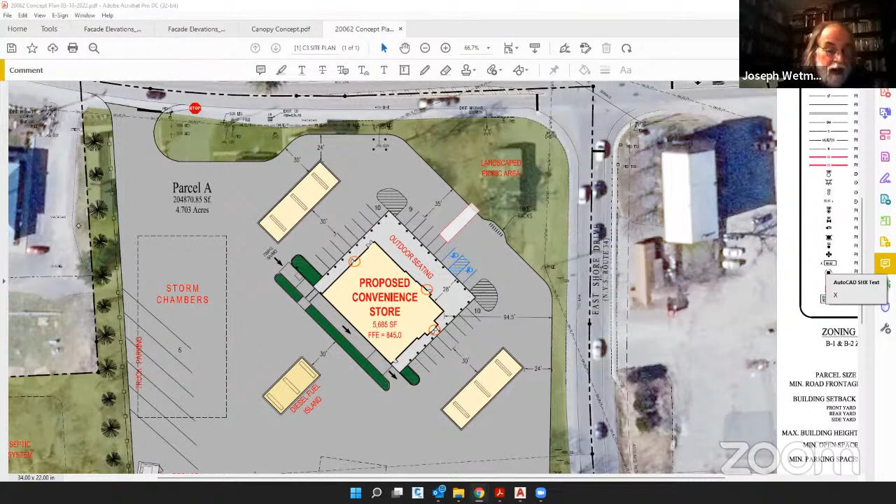I'm really concerned about that neighbor who's going to get headlights 24/7 shining at her house. You're going to make that house really a hellish place to live. I don't know how we can fix it, but I can't just say, oh well, she's getting headlights shining in her house 24/7 from trucks and cars pulling through. I think that's a real issue that needs to be dealt with somehow.

Yeah, we should probably look at the elevations there. Doesn't that house sit up a bit? Yep, it does. And she's getting it from people coming down the road or whoever it is.

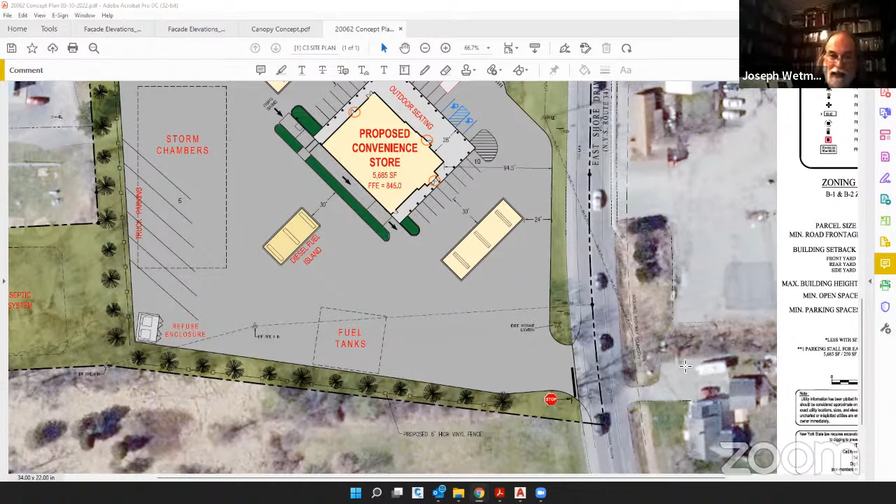Yeah, but these are going to go straight into her windows, right? It's aiming cars right at her house 24/7. We'll make sure—I think I got a couple more feet this way that I can use so that if a car's parked waiting to exit, the light's not shining into the house. Let me see how I can deal with that.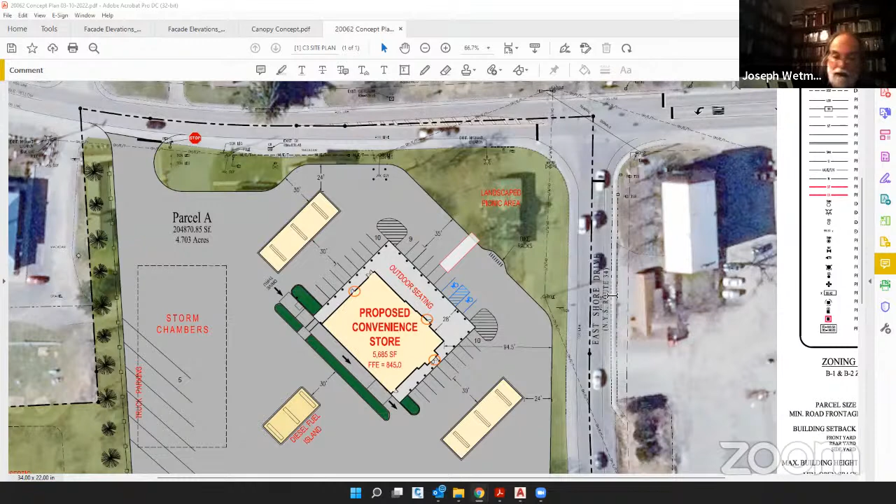My other comment is just rereading the comprehensive plan—this doesn't seem to fit at all what the town discussed. In the comprehensive plan, it was really talking about the building up in the corner. I know you like to have people driving all around your business, but it doesn't fit anything described in the comprehensive plan. The plan talks about this corner pretty extensively—it's an important point, we used it as our example for form-based zoning. This just isn't really coming close to what was envisioned.

Okay CJ, any comments out there? Yeah, absolutely. So in terms of the truck parking, I would definitely echo the concerns. We'd like to see a swept path turn simulation as part of the submittals, and I'll follow up with applicants about your contact with DOT, because we're definitely going to have to coordinate with DOT on this project.

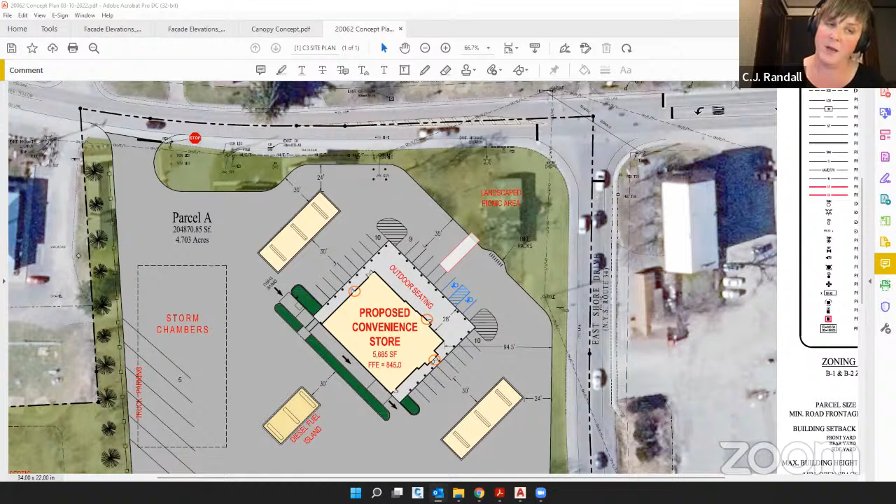The town has undertaken—I assume John has sent you the transportation study done for the town center area, as well as the Cayuga Lake Scenic Byway plan and such. But I'm definitely concerned about that truck parking area and its adjacency to that play area, about 10 feet away, behind what I believe is likely a vinyl fence. So I would very strongly reconsider the diesel fuel island and the truck parking—the adjacency to that children's play area is certainly concerning.

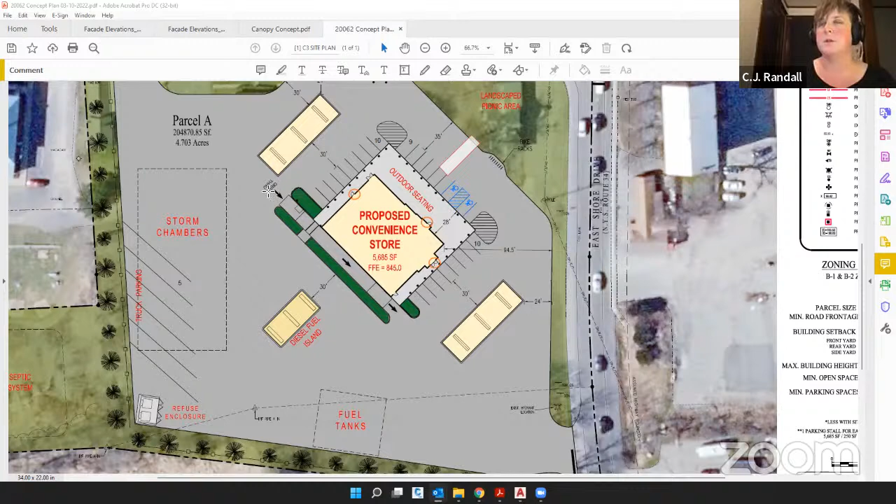As for the building itself, that Pizza Cafe Deli sign area—we were wondering if you'd consider a similar fenestration treatment, the window treatment you've chosen there to the south, with the idea of continuing to activate that space so folks enjoying that area could actually see into the building.

John kind of joked about the kid test, right? You're sitting there having a drink and your kid goes in to get a candy bar, and you could still see them. We're thinking that could be a nice treatment. We're also curious about that kind of orphaned awning over there to the north—I assume there's probably mechanicals or some kind of prep area behind there. But we do appreciate the articulation in the building, the treatments, and the human scale materials.

I'd like for the next meeting, which I'm anticipating in person, to see some material samples—if you could please bring those to the planning board. I have a feeling they would really enjoy the tactile experience of handling those materials and really seeing the true colors and textures as well.

The last question I have for the planning board is whether you think it's most important to get some exterior photorealistic renderings of the building. I'm assuming applicants will come back with some pretty detailed exterior elevations, but I'm curious from your perspective—I'm assuming definitely Rogues Harbor, for the historic nature of this, but are there any other places you'd really like to see, some sims and photorealistic viewpoints of the building and the site itself?

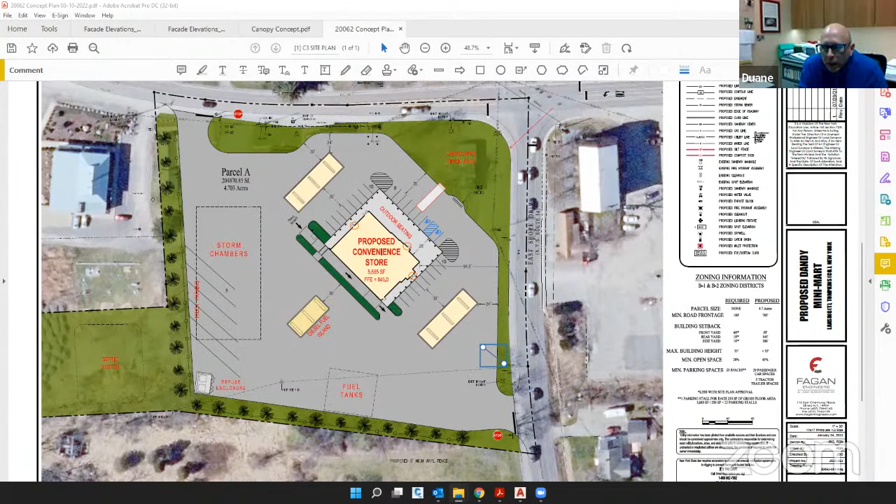I'm not sure I'll have this done and complete by your next meeting, but I actually have a company working on a 3D model of the entire site, so you'll be able to get exactly what you're describing from a pedestrian point of view, say at the intersection. You'll be able to navigate the entire property and get a real look whichever direction you're facing. These will be both daytime and nighttime.

Will they be the equivalent of what you'd see driving up East Shore Drive and turning the corner, or just a pedestrian view? Yes, they will be both. They'll actually take elevations into play on the site.

Back to what Joe commented on, and some community members wanted more of a building presence at that intersection. But I think if you incorporated sidewalks and some decorative landscaping features with trees and shrubberies, while pushing the store back away from the road, it would be more acceptable to the community and a good attempt at a compromise.

I have a question for CJ, Al, if I could. With regard to the buffer between this property and the property to the west, I suggested earlier in the process that something more substantial was going to be needed there - a wooden fence rather than a vinyl-woven hurricane fence. Would a change in material, style, and height of the fence serve to make things a little bit better?

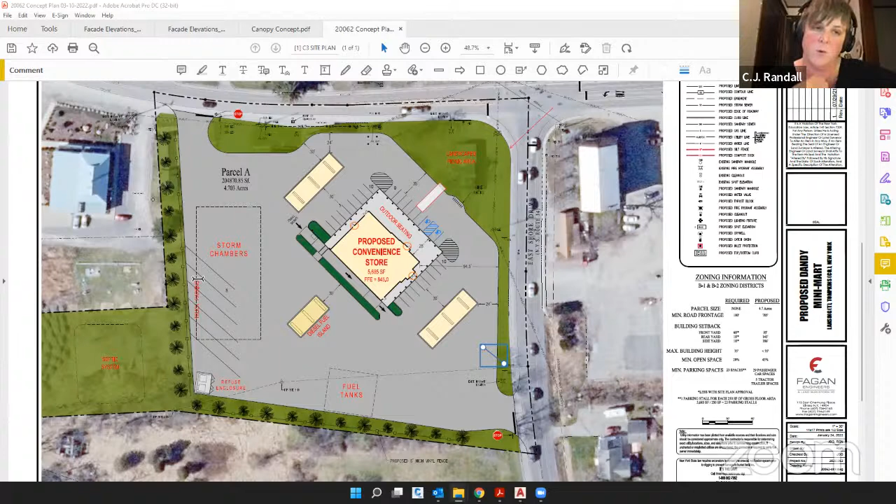I have some concerns about the geometry and swept path through the site, so that's definitely something we're going to want to see moving forward. I'll follow up with applicants about the DOT contacts since we'll have to coordinate with them on this project. What we were going to do is carbon copy you on the last email thread. Perfect, John - okay, great, marvelous, thank you.

Erin, or Deb, or Sandy, I didn't hear too much from you guys. Any other comments from anyone else? Erin?

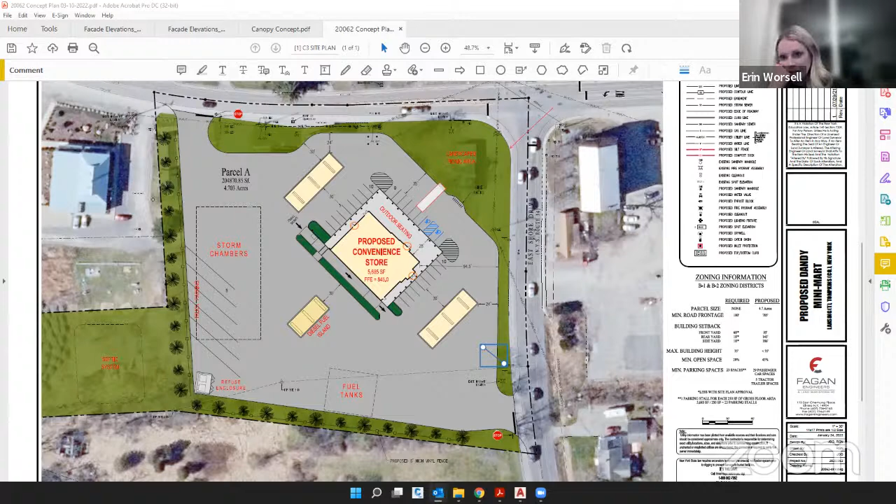I think Sandy hit on it. Over the last 2 years of living in this area, there's definitely been increased foot traffic. So I'm curious to see what that front landscaped area looks like with the picnic area. I also want to echo Dale - I don't feel a diesel pump is necessary, but I have a lot of concerns. If I was a parent and my child was at that daycare, I don't know if I'd choose that daycare, looking at it from different angles.

I also agree with Joe. I don't think that, when you're looking at the comp plan, that this necessarily fits in with that.

Sandy or Deb, anything else? Yeah, I want to echo Dale's comments and Erin's comments about the truck parking, whether it needs to be 5 trucks there and how a truck would likely use the area. When I've walked the area, there may be a total of 8-foot difference from one end to the other of the property, but right next to the daycare center, it's pretty shallow.

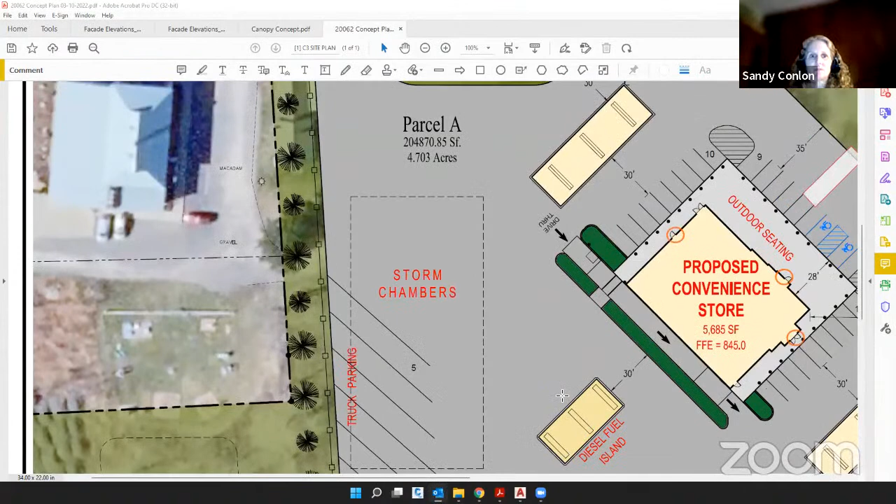Sandy, anything? I'm not happy with the trucks where they're located either. It would be horrific if something happened and the truck rolled backwards into that daycare playground. Talk about a liability issue - that's huge.

I also agree with Joe about the comp plan. It's not an ideal situation when we developed the comp plan to have a convenience store located in this corner, but I do like it set back from the corner because then it gives it more like a park-like feel rather than a big building there.

Thank you, anyone else? To be honest, the DOT made a comment that they want the building back. It was interesting.

In the truck parking area, you talk about fencing - you might want a solid vinyl fence, but you probably also want bollards there as well, so that trucks hit something that will stop them.

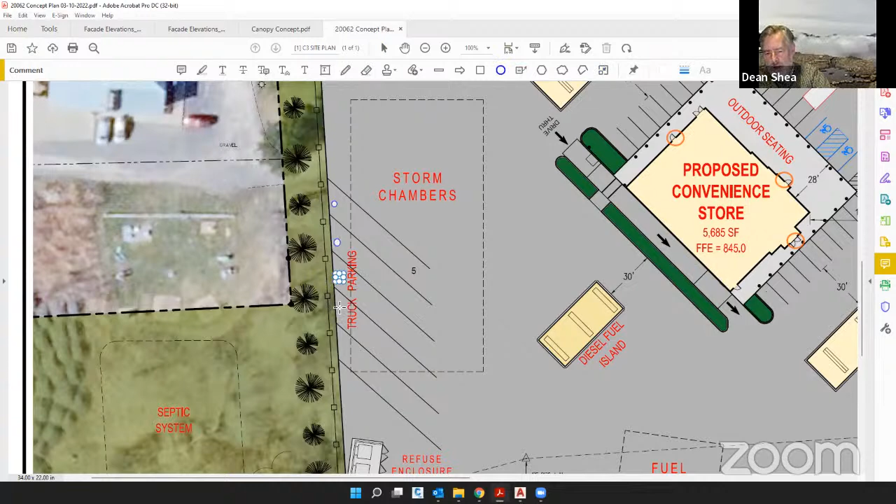The other way I would see to move that convenience store up into the corner would be to get rid of the drive-through. I'm wondering, Duane, if you can comment a little on what kind of drive-through experience you have - what percentage of your stores have it? Are you converting and adding drive-through lanes? Is this typically the morning commute that uses the drive-through for coffee, or what's going out the drive-through window for the most part? Is it lunch as well?

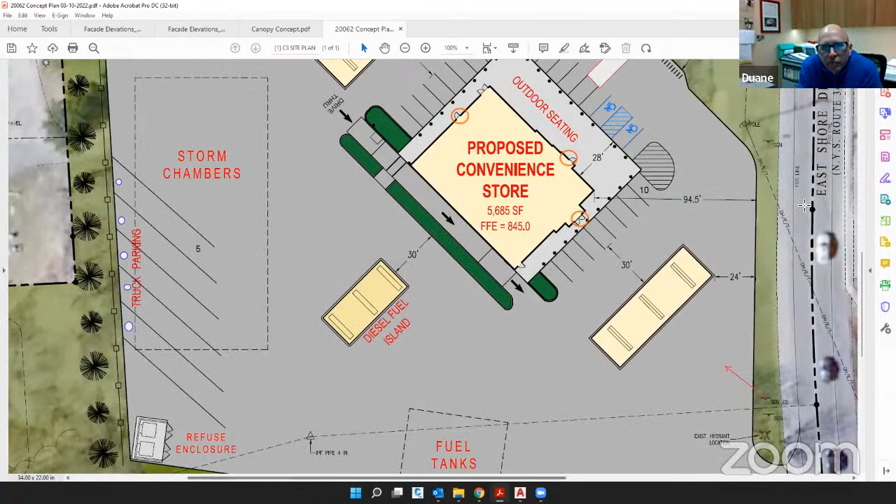I wish I had information to share with you. We don't run a single site today with a drive-through. We are in the process of converting 2 existing sites to be drive-through. I've got another site we built 2 years ago that is drive-through ready, but we haven't started to operate it. It's something we've built into our store design so they're drive-through enabled, but whether we start out operating it on day one, I don't know. It's more of an option-rich thing, so that if the future becomes even more drive-through than it is today, 3 years from now, we're in a position to run it, so our business stays viable moving forward.

We may never run it, but our vision of a drive-through for us is coffee - a limited number of sandwiches, pizza slices, those types of things we can put out the window quickly to a customer. I think it's something needed in the community in the mornings, if you ever go up to the donut shop and see the lines backed up for coffee. At the same time, you're going to have a sit-down area for coffee inside as well, correct? Correct. So that's also needed in the community. There's positives and negatives on any project, so hopefully we can soften some of the negatives and accent the positives on this project.

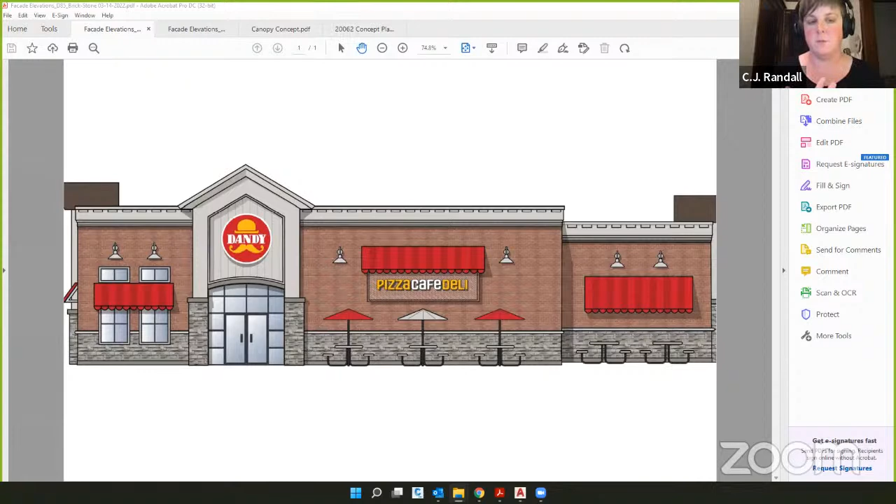I think it would be marvelous in person on the 28th to see some of those material samples, if we're going to be all in person yet again. Okay, great. We'll follow back up with the applicants. We've got a bunch of coordination and prep for the meeting on the 28th, but we'll certainly coordinate with them.

We'll update that EAF, just so you guys understand that EAF is outdated at this point. We have to redo all those forms, and we'll coordinate with CJ and John. Yeah, those are from the last round of application, I think. That's why I was confused. I caught some questions about that earlier. Okay, cool, thank you. I think we're set for tonight on this project.

Jamie and Duane, thank you. Thank you for your time. Okay, thanks.

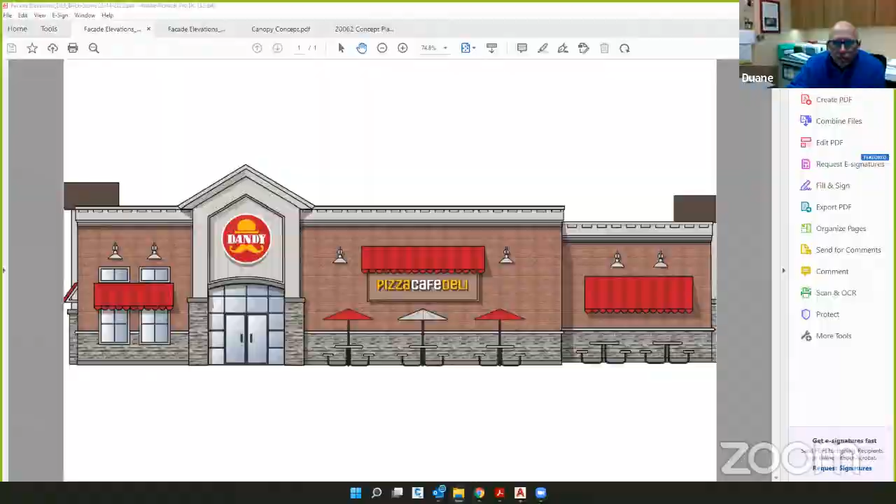Move to adjourn. Okay, board members, thank you. I thought it was a very good meeting. You all brought in ideas, comments, I appreciate that. Community appreciates it. Thank you all for your input.

CJ, is that a subtle reminder that we are going to be meeting in person on the 28th? Well, I'm figuring that unless something incredible happens by the end of the day Wednesday, the open meetings law will return to being in effect, and we will be meeting in person on Monday, March 28th, almost 2 years to the day.

Wow, so you guys have been really good sports. Thank you. Remember, we were back for a couple of meetings, but yeah, we had that. Yeah, 2 years to flatten the curve. Happened pretty quick.